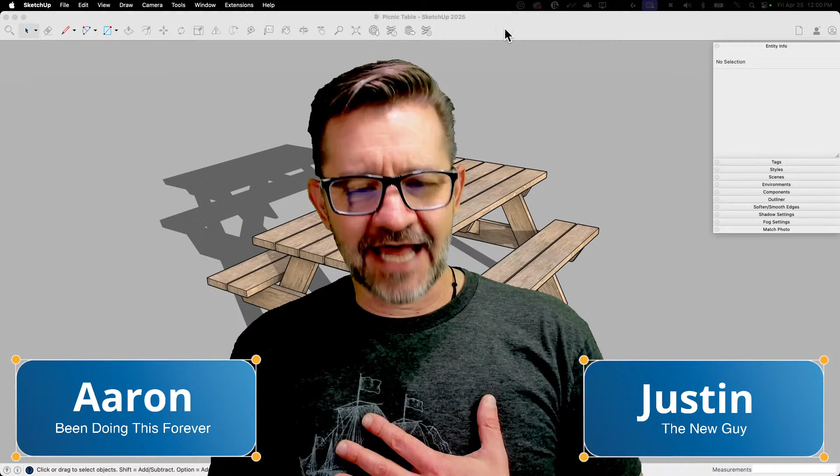Thrilled to be here. First time, a little nervous. So yeah, if my voice starts cracking or if I send an SOS in the chat, please send help. Send help. Let's hope we don't have to send help. I think it'll go good. Justin's not new to any of this. He's just new to being heard by you guys.

So he has been part of our team for quite a while. He's responsible for some of the awesome work we use in marketing, modeling, and that kind of stuff. He knows his way around SketchUp, is what I'm saying. So this is going to be good. Just somebody else to come in and ridicule me on your behalf. I've been doing it in private for the last couple of years, so this is nice to be live. That's right. No, this is not Mr. Geis. This is a different Justin. This is the other Justin. The other Justin. That's right. Yeah, but this is going to be fun.

So you guys may have caught we had some issues. Well, I've actually had issues. Well, okay, I've had issues, but specific to streaming, we've had some issues the last couple times I've streamed where the stream has frozen or dropped, and after that happened 2 weeks ago, we spent the afternoon basically trying to figure out everything it could possibly be, and I think I traced it down to some hardware that needed to be reset. Ripped out all the cables, that's right. Bought the most expensive versions of everything. No, we didn't do that second part. Some cables got ripped out, but yeah. So we think we got a good solution. Been doing some testing for the past 2 weeks, and knock wood, everything's gonna go well. I have not had issues since we did those resets, so I'm really hoping that we don't have an issue today.

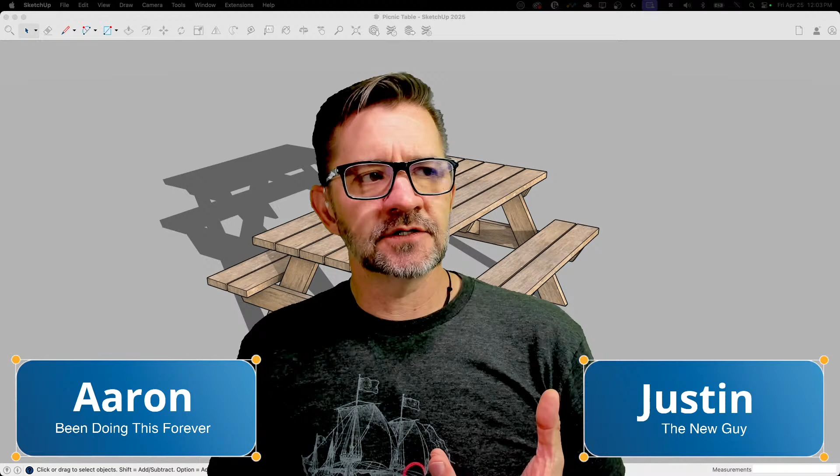One of the misconceptions that we hear a lot with why people don't use LayOut is what they're expecting is like this automatic thing, right? Where you just go in and you say, make my picnic table into a shop drawing. And that's all there's going to be to it. Unfortunately, it's not quite that simple. So we are going to touch on some of the things that I would personally do to take a DIY type project like this and get it ready to send out to my own shop or to give to somebody else to make.

This is not necessarily going to be how everyone would do it. If you're doing a house as opposed to a picnic table, there's different steps, or different deliverables, but the steps are going to be similar. So I don't know, that sounds too much like a disclaimer. I'm just letting you know what our plan is, really. It's going to be cool. Something's going to come out of this, and then that thing will be what it is.

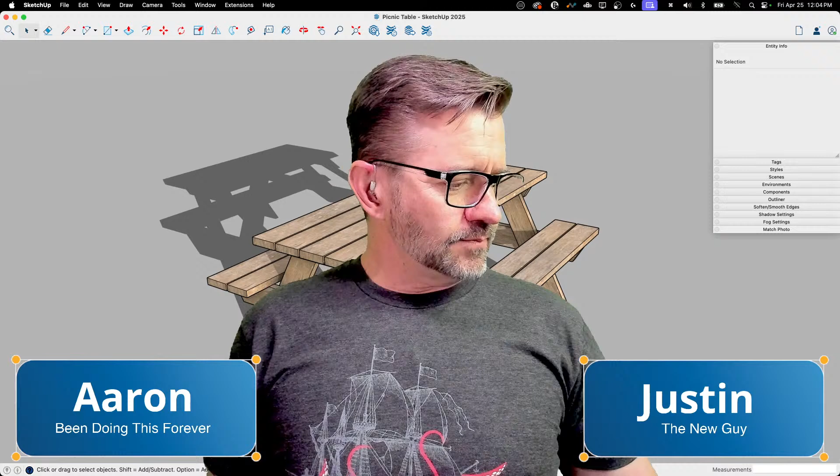Let's roll. All right. Yeah, so let's start by looking at this. This is the table we made last stream. So I tried to keep it very simple. There's actually only two sizes of lumber. There's 2x6s and there's 2x4s. Most of this is all 2x6s. The 2x4s are here as these diagonal braces, and then here underneath the benches.

And that's it. That's all there is. Two different sizes of lumber, obviously different lengths, different cuts, but pretty simple. I did go through and do some high level grouping, right? So the tabletop and the seats are the 2x grouped together. These end A-framey shape things are a group, and then this section, the center, is a group.

And so that's everything we did. I'm just pointing out the grouping because I did that. Just wanted to show you guys. So one of the questions that came up as we were talking about doing this was, can we create a cut list? So not necessarily a drawing; we're gonna do a drawing in LayOut for sure. We're gonna do imagery, 2D imagery that I can print out and, like I said, build from. But separate from that, people were asking, what about a materials list or a cut list, that sort of thing.

So I thought, okay, that's how hard it is for you guys to convince me of doing something. But yeah, we can do that.

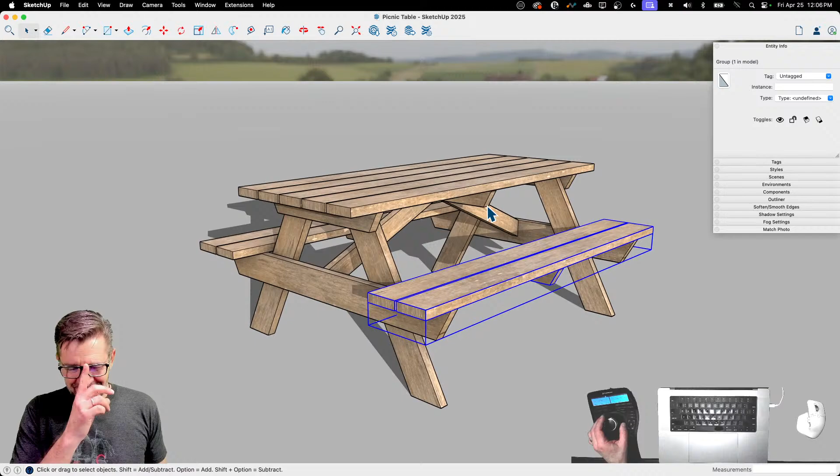So I figured we'll spend the first part of this in SketchUp. We'll go through and we will get a cut list for this right here. I'm gonna use Generate Report. There are extensions out there. There's Make Cut List and OpenCutList and a couple others. I don't have any of those loaded up. We're just gonna use Generate Report. This is gonna be simple enough. Like I said, 2 different sizes of material. It's gonna be pretty quick and easy, and not that many cuts. I mean, we have like 1, 2, 3, 4, 5, 6 or 7 pieces is all.

Cut lengths. I mean, we have to do some of them. Even I could assemble this. I think you could do it. I have total faith in you.

So we'll do that. We'll get a cut list made using Generate Report, and then we will get some scenes set up that I want to use in LayOut, and then we'll take it through to LayOut. We'll put the cut list on the output, and then we'll have a cut sheet and an assembly sheet and all that stuff. So let's go. First thing I'm going to do, it's not save. I'm going to turn off shadows.

So you guys know, we've talked about in our videos, a lot of work has been done on making SketchUp just more efficient, faster design, that kind of thing, which is great. One of the only visualization pieces that has not yet been improved is shadows. So shadows can still kind of bog down your model. So that's why I turned those off. But hey, more opportunity to get even better.

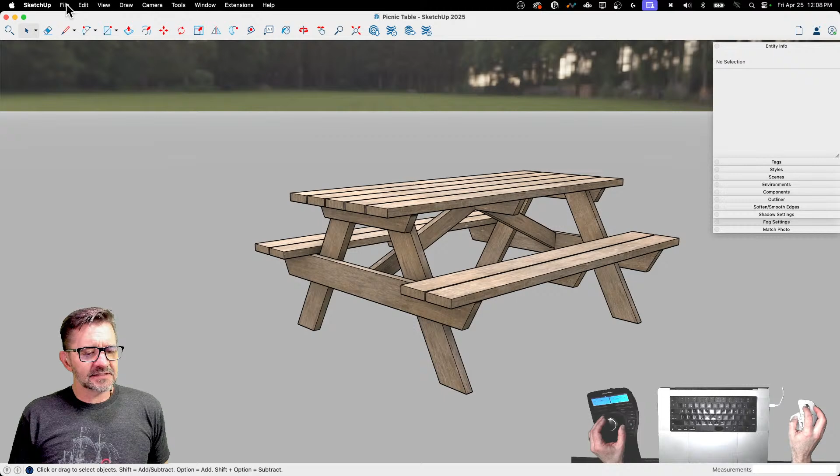Okay, so let's look at this. In case you guys have not seen this, I'm going to go to Generate Report right now. This is the Generate Report window. I haven't saved any templates or anything, okay, never mind. I'm straight up lying because I guess I did this one. Oh no, that's today. Never mind. That's the one I will be working on right now, but I haven't saved any other ones in here, so we're working from scratch. This is what you would see if you just went in and hit Generate Report.

What Generate Report does is it runs through your file and it finds entities, components, or groups that it can report upon, and then puts them into a report, a list, based on the attributes or qualities you select. That's a simple explanation. So what it allows you to do is real simple stuff, like if you want to do a quantity report, like a quantity takeoff. How many rubber duckies do I have in this model? You could run that report real quick, and it'll say this many of this component, and there you go.

But we can go a lot further with that, because we can say things like, sort my material by width, by height, by length, and consolidate by this or that. So there's some options that we can go through. I'm not a master of this. I don't use it very often, is my biggest issue, but it usually comes back pretty quick. So we'll do this.

It'll be great. It'll be good. Yeah, go for it. No, I just thought you had a comment. Yeah, no, it's going to be great. I haven't really used Generate Report either, but I consider this a learning exercise, and this will be good to see. It's going to be something. I promise you that.

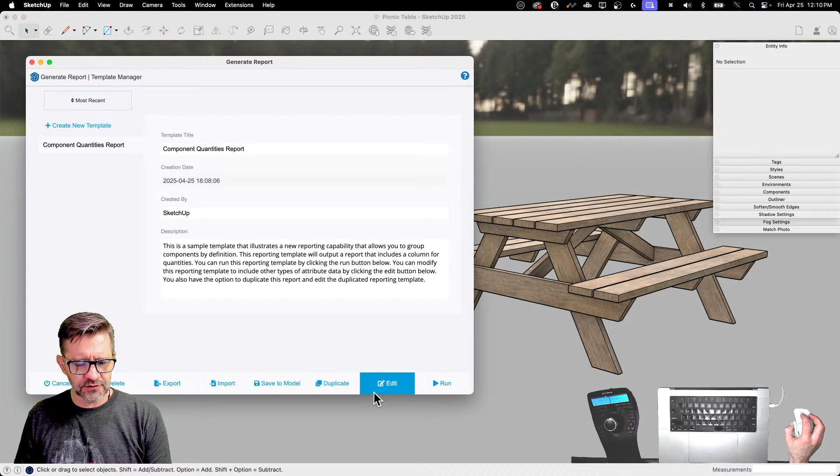different from what's here. So what I'm going to do is I'm going to create this new report, we're just going to call it like a table cut list, specifically designed for this table right here. And then I'll hit edit. So there's a couple things in here right off the bat. I'll try to get everything on screen.

My head's not in the way. Nice. That's professional, right? That's just professional experience that I'm not covering something up with my face. Look at everything's on the screen at once. Sorry, just had to pat myself on the back, I guess.

All right. So with this, the first thing we have the ability to do is say, do I run this on the entire model or do I want to run it on the current selection? Personally, I almost always set this to current selection because what I'll do is then intentionally go through, pick the pieces that I want to run the report on, and then say, now just run the report.

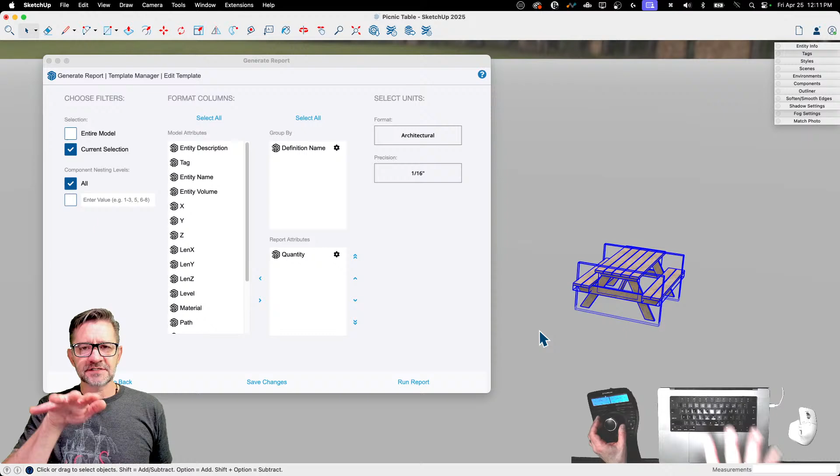The reason this is important is a lot of times as I start making these kinds of models, I'll have duplicates of the same geometry over and over. So when I'm done, what right now is just a picnic table, this same model is going to have copies of all this material laid out for cutting, different pieces in different phases of assembly. So while I have 1, 2, 7, 9 of these boards right here, the final model might have like 22 of them. So I want to be very intentional about what material goes into my cut list. So that's why I usually leave it on current selection.

All right. The next thing, this is very important. Component nesting levels. So I have an option for all levels, or I have enter the level that I want to report on. So what a level is, remember I was talking about how I grouped all this stuff together? Each group or component is a level. So my top level would be what I can select from the outside, right? So here, I have 1, 2, 3, 4, 5, 6 groups. So if I was to say only report on level 1, I would get reports on those 6 pieces.

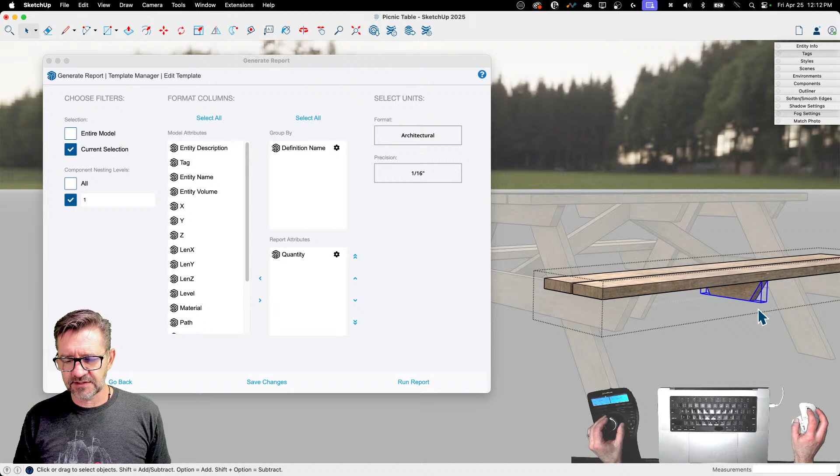That wouldn't do me very much good because I can't cut this piece, right? This is 3 separate pieces. What I actually need to report upon is a level deeper. So this piece plus this piece plus this piece, that's a second level deep. I think that works for all my groups. I'm just going to verify I don't have anything else grouped together. Yeah. So if I run my whole report on level 2, that should give me cut lists for each of the pieces that are in those larger groups.

I said should just now. Fingers crossed. I'm not a huge fan of the term should because I think things are or are not. I don't like when people tell me should, but sometimes I use the term should because I'm not 100% sure. We're doing it live. That's right.

So to the left of that, here's the attributes I can pull from a model. And here's where I actually have them. Here's what's going to be reported. So in here, I have definition name. So remember, as we were making these, let's pull this up. If I come into this board right here, we tagged each one with the actual material length. We're going to change all of our tags. I didn't put this together with the intention of running this report. So we're going to change some stuff.

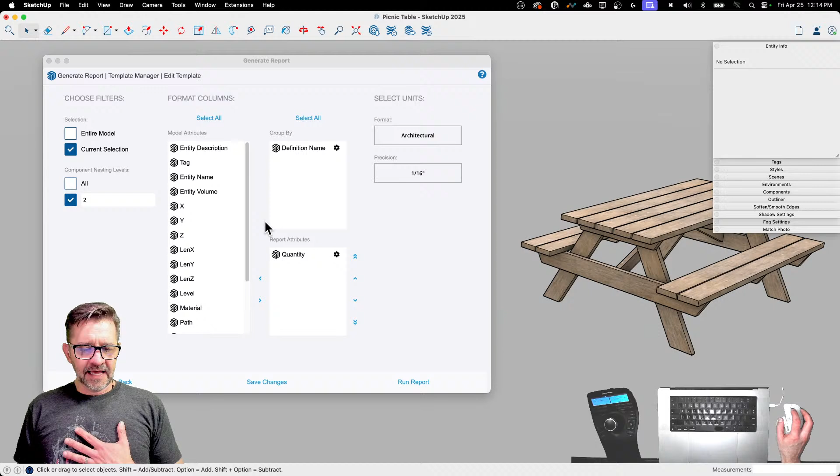But definition name is whatever it says right here, definition name. So if I come into these ones, here's my different pieces. That's what it's going to report upon. And it's going to report the quantity of each. When it runs the report, it's going to use architectural, which is fractional inches, fractional feet inches, and then I have the ability to set a precision. So I can set my precision up to a 64th of an inch. For something like sawing wood, a 16th of an inch is plenty for me.

I'm not doing some amazing Japanese hardwood. So this stuff's all coming off the framing bunk at Home Depot. 16th inch is plenty small for me. Yeah, we're making a picnic bench here. I mean, come on. If you can have picnic on it, I think that's good enough.

Is the top like this more or less? We're good. Right. So I'm not going to do anything else. I'm going to say my current selection. I'm going to say go to the second level deep and give me a full quantity of each type definition name. I'm going to do a select of everything, and I'm going to say run report. And here's what we get.

So this tells me, okay, this thing called 11-inch 2x4, I need 2 of them. This 2 foot 3.5-inch 2x4, I need 3 of those. And this is all I set it up for, was give me a total quantity of each one of these things. That's awesome. That's simple. That works.

The nice thing about having this list, this number right here, is when I go into like my cut list or my drawing, I can actually use tags to put that name onto the materials. It's not great because, like I said, unless I want to go beyond this, I'm a little bit limited by the amount of information in here. And also, I kind of fudged some of these numbers because they were about what length they were, not exact.

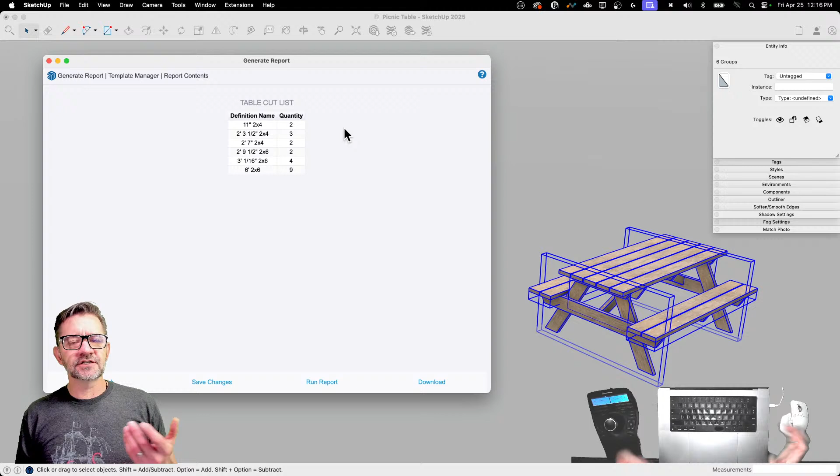So this is okay. So right now, if I needed to know how much lumber, I could use this right here to generate like a consolidated cut list. How many 8-foot 2x4s do I need? How many 12-foot 2x6s do I need? I could use this list to go figure that out. That could be how I use this.

Let's look at going a little bit further and actually getting like the width of the material and then let it report upon the length. Let's see how that works. I'm going to go back and we're going to change some stuff in here. So we're going to look at these values right here: X length, Y length, Z length. So I'm going to bring all of those over here. All right. I'm going to actually take definition name off. I don't necessarily want that right now.

Ooh, material. That might be kind of fun. All right. And then we will... I don't remember which is X and which is Y. So I'm going to do this wrong. We will definitely want to report the cut length down here. And then... yeah, I'm actually going to get rid of material. I'm going to run it. I don't know. Let's see what happens. Okay, that was wrong.

All right. I mean, this is not bad. This would be usable. It's workable. So right here, my Z lengths, I was consistent. That's the important part. The important part is not what was Z, what was X, what was Y. The important part is when I created, because I started with one piece and then they were all the same. I know with some things like the cut list extension. Okay, so quantity, Z length.

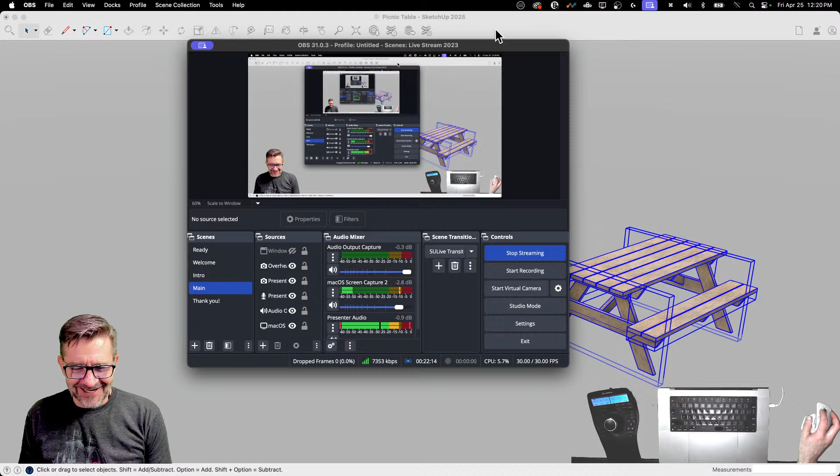Okay, we might be back though. Might. Should. Oh, we should be good. All right, that's good to hear. All right. Yeah. Looks like we're back 100% now. Okay, so let's do a quick sync check. Audio, video. That sync up right? Yeah, looks pretty good on my end.

We're probably all a little sensitive too right now, right? I think it's something about picnic benches, like it's got a curse. We should just go back to modeling sharks. Yeah, apparently. I mean, hey, say what you want about that boring, terrible video card modeling. It was smooth. Totally. It was horrible and terrible to watch, but it was great. Okay, let's keep moving here. Ugh. I don't even remember what I was doing anymore.

So I forget. I want to consolidate by, yeah. All right. So there we go. The simplest, easiest possible cut list I can make is this. So we're going to consolidate by Z length because that's the actual cut length I want to do. And then also display the other sizes here. If we run that, I need 11 inches. I need 2 cut from a 2 by 4.

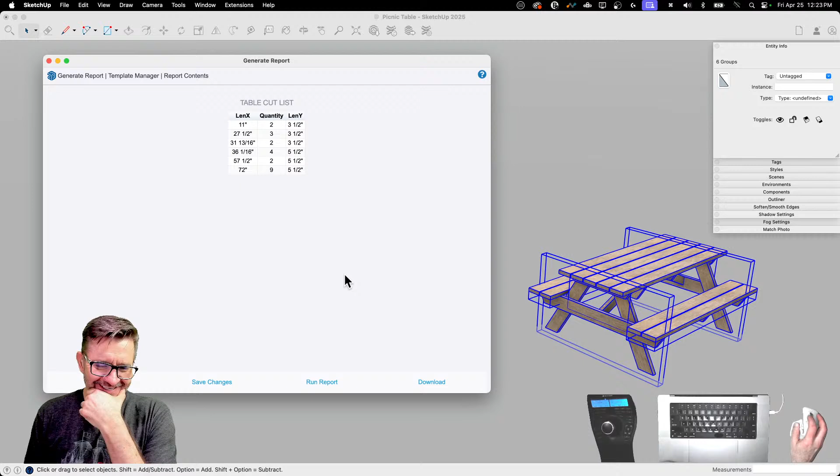That's right. Ooh, what kind of wood is that? Don't know. Yellowy. I don't know. Yeah. It's not plastic. I like to call that an X tree.

Yes. I'm trying to think how to most easily get this into a table in LayOut. I think I can just copy this, and then I'm gonna hop over here and make a quick scratch document that I can just dump those values in so I can bring them back in.

Alexis has a good question here. Do reports work with groups or do they need to be components? It'll work with groups or components. So in fact, just to show how this train wreck could have gone, if I run this on all instead of 2 levels deep and run it again, yeah, see all this other stuff it shows? These are the outside containers. So you can see rather than where I had just 3.5s and 5.5s before, now I have something that's 57 by 3. So these are those outside containers, those groups.

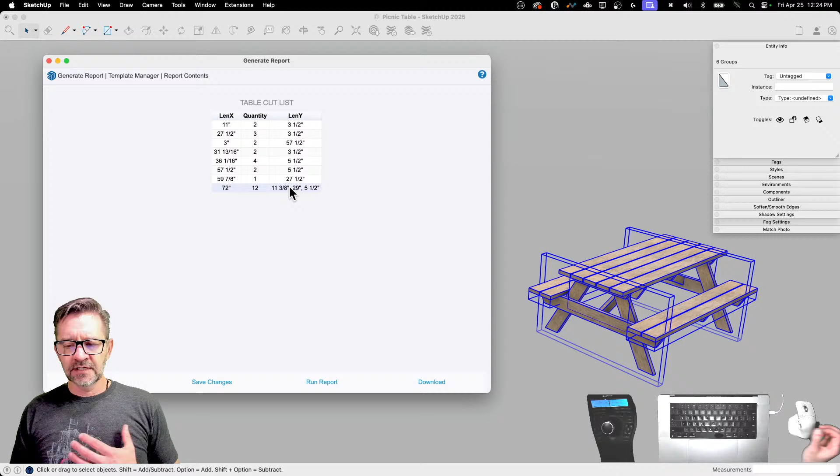So you can see that you do need to be intentional about how you sort your material. In fact, if you wanted to, one of the things you could do is I could keep this. I could go like this. I could grab this, make that into its own group. So there's my finalish product. I could take that and set it off to the side.

And actually, last time I created a cut list, this is how I did it. And then this one right here, I'll explode once and explode twice. And now everything is on the outside. So everything is just one group deep. And then I could select and run the report on that, which should give me the same exact output as when I was going two deep. So it really depends on how you want to maintain this.

I will admit that for me, when it comes to the point where I'm generating output, I don't always maintain the cleanest, best files in the world. They're not hero models. So this thing right here might go out, save that as its own component, save that as its own piece over here. And my working model may actually be a little bit of a mess, as long as what gets to LayOut is what I need and it looks good and works there. Yeah, it's good to be honest. Sometimes your model's a mess.

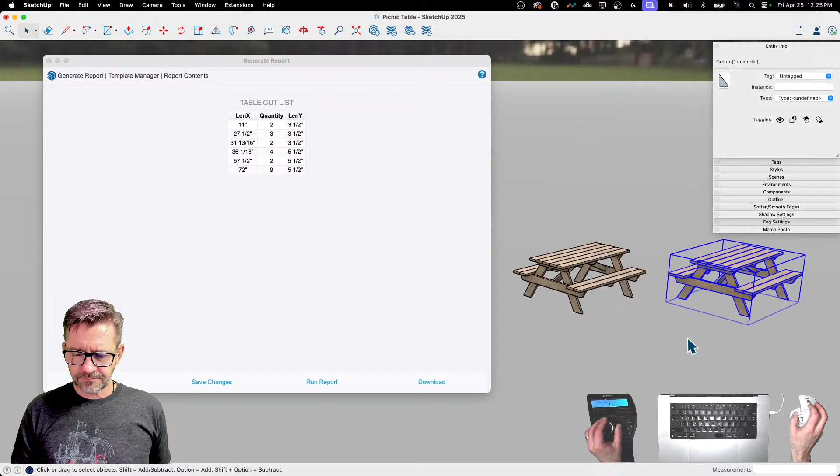I try. Okay, so what I did off camera, again, just trying to be transparent with everybody, is I don't actually have Microsoft Office or anything like that. Everything I do is through Google. So all I did was copy that text and paste it into an empty doc that I can copy and paste back in. I could save that into a file that I then re-import later, but that would mean saving the file, downloading it as a different format, and I'm just trying to keep it simple. So that would be an option, to save it out like that.

All right. I'm going to go to View, get my axes back on. I turn my axes off when I generate thumbnails, so that's why it was gone. That's why the shadow was on, because that stuff looks good. Yeah, real good. And those materials too. I think we should take a second to just talk about the materials. My goodness.

Yeah, the only problem is it looks like it's made from reclaimed lumber, or was built like 10 years ago. It has been sitting outside, but that's okay. It's seasoned. Pre-seasoned. Tasty.

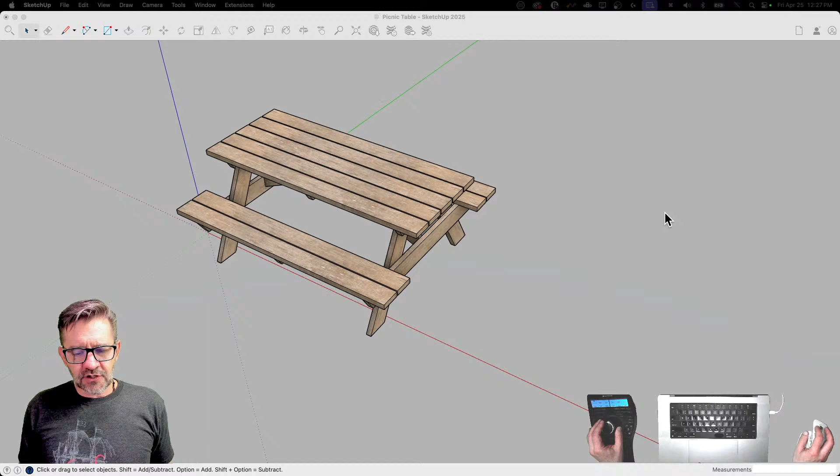I'm going to maintain my hero over here, that'll stay so I can get a nice picture, maybe turn on shadows and ambient occlusion, get a nice looking thing to slap on the front, because I'm making a little booklet showing how this goes together. Over here is where my mess will be.

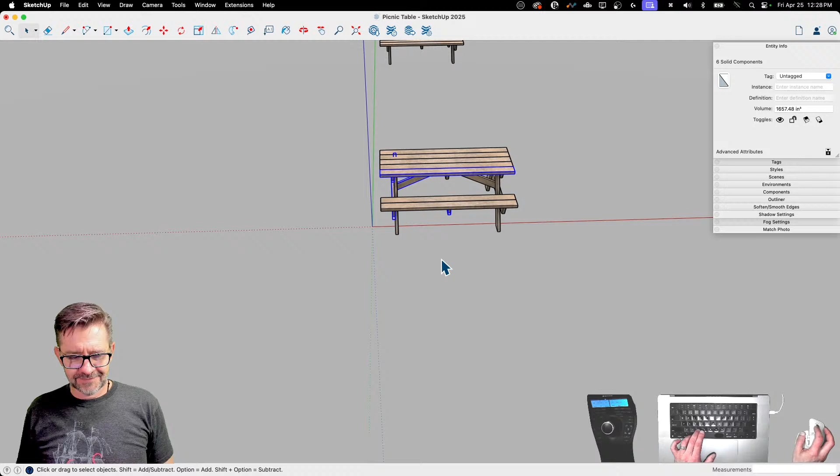First things first, I want to grab one of each piece of this model. So one of this, one of this, one of this, one of this, and one of this. 1, 2, 3, 4, 5 different pieces. Wait, 1, 2, 3, 4, 5, 6. I'm missing one. 1, 2, 3, 4, 5. No, I got them all, I just didn't count right. Nice. Math.

Who knew design would require math so much, man? Ugh. Every teacher I ever had was right.

Okay, so again, I've spoken to several different people about how they lay stuff out for their output. A lot of people do this differently, but I'm just a big fan of grabbing my stuff and throwing it on the floor. So I'm going to do that.

I'm just going to grab each one of these, slide it on over here, and drop it. Oh hey, back off, get in my face. All right, there we go.

And of course I want everything to be the same orientation, so I'm going to get everything laid flat like this, put it right here. And just so this looks nice, I want a consistent spacing between each of these pieces on my cut drawing. So I'll come over a consistent length, let's say like 12, so maybe a foot apart like that. That's good, we'll grab this one.

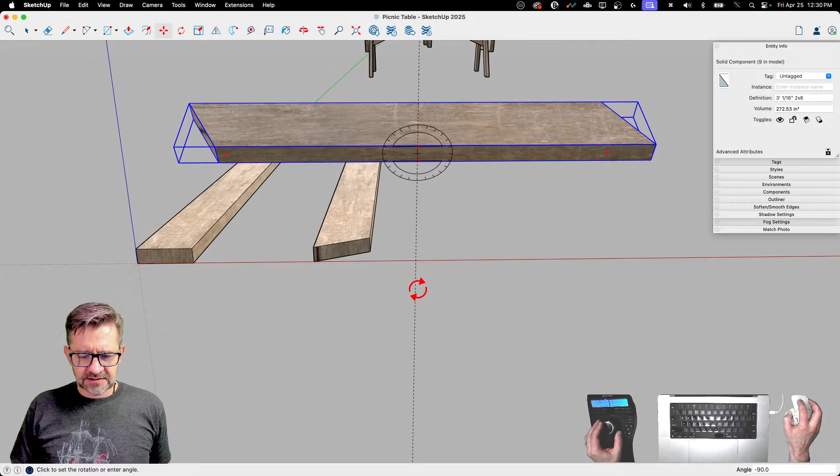Again, I want to get everything laid flat, so I'm going to turn it like this, and then turn it like this, letting it snap to the axes, and then turn it one more time like this. And there we go. Slide over 12.

We get this question a lot from people newer to SketchUp: when I try to move a thing, I can't snap to the thing I'm trying to snap to. When you're in perspective, you've got distances between the camera and where you're clicking, so sometimes it's hard for it to figure out if you want to snap up here or back there. One of my solutions is to flip the whole thing upside down and go underneath to snap things around. Sometimes that works, sometimes - nothing's foolproof. Very Stranger Things-esque, cut list in the upside down, baby.

Oh yeah, sometimes I'll just throw - I'll draw a rectangle or a plane on the ground and just snap everything to that, then delete the plane.

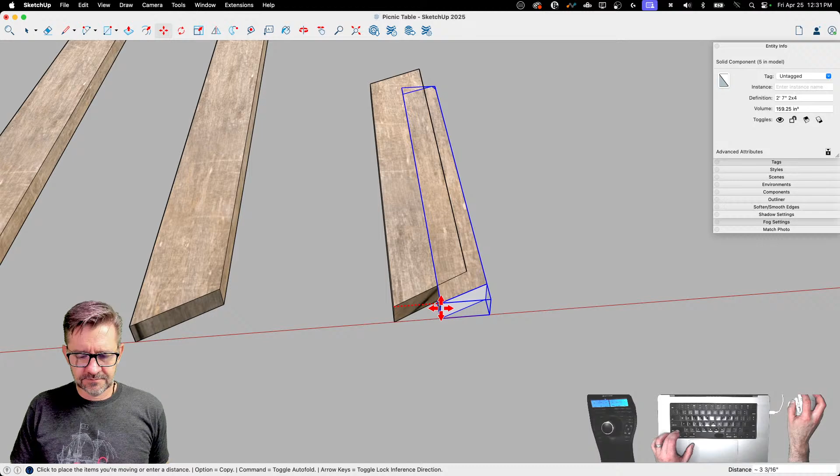That is great, let me show you exactly what Justin's talking about because that's a great call. Yeah, because then it's all on the same plane. It's easy - you can even use the extension to drop everything down onto that plane too. So if I'm working on a plane like this, it's real quick and easy to just take this and go straight down, dropping it vertically till it hits. And I'm done. Very quick.

This way, and then I'm going to flip around. Actually, I'll go this way - I'm trying to align my cutting so it's the same direction as well. Oh, I thought these were the same angle. I thought I was going to get away with that.

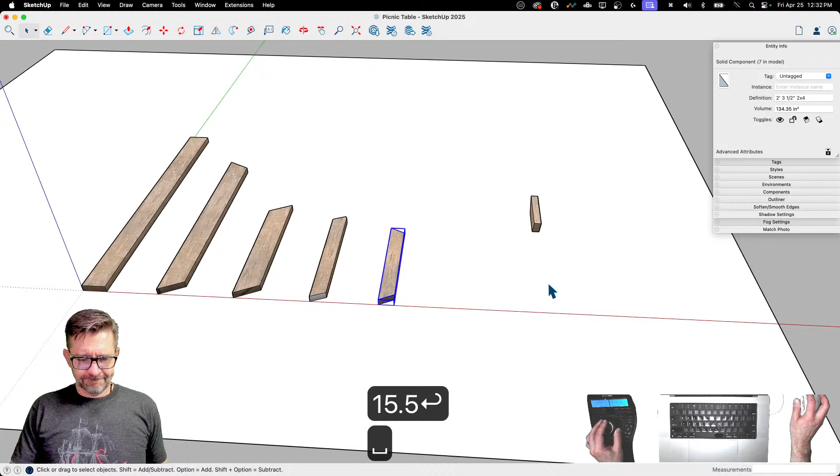So this is stuff that I can make the call on. I went from longest cut length to shortest cut length. In theory, all my materials happen to be the longer cut lengths are 2x6 and the smaller ones are 2x4, so it worked out well, but I might have to make a call if I want to keep my same material cuts the same or not. I don't know. That's a thing to think about.

All right, here's a thing I want to look at. So my materials here, if possible, it would be great to have all my angle cuts be the same. So if I grab a tool I almost never use, which is the protractor, I see that that's 28.6 degrees. I don't remember how we actually came up with that. That just looked nice, I guess. That's 28.6.

It's an aesthetic choice, that's right. That one was 28.6 too. Okay, so most of these are the same. I use the same end cut. I don't know, that was 2 weeks ago. I don't know what I did.

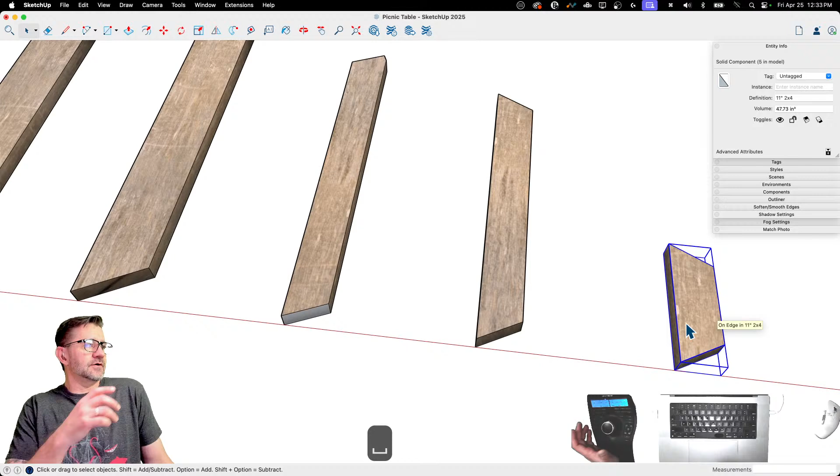This one ended up as a different cut because this is that angled piece that comes right here. I could spend time, I suppose, sliding that vertical piece up and down so I got the same cut, but this seems like one cutting different or one angle different is probably not worth going through and adjusting my entire design. As soon as I start moving that stuff around, then my other cuts change, and I'm not going to mess with that.

So I think we're good. I think this is going to be my cut sheet right here. So what I'm going to do to actually prepare my scene, I'm going to go to a direct overhead view. I'll go to camera, standard view, top. So now I'm looking at from the top down. For this particular scene, I don't want perspective, I want just a straight-on look.

So I'm going to go to parallel projection, and I'm not using my 3D mouse at all now. A 3D mouse is really hard to keep everything flat in plane. It's real easy to just kind of start moving it around like that. So I'm only using the scroll wheel on my mouse right now.

Orbit, which I did not want to do. I just showed you what not to do. All right, let's try that again. Let's go back to camera, top view. And then I'll just roll this up until it pretty well fills the screen. That looks good, I'm going to save that as my first scene.

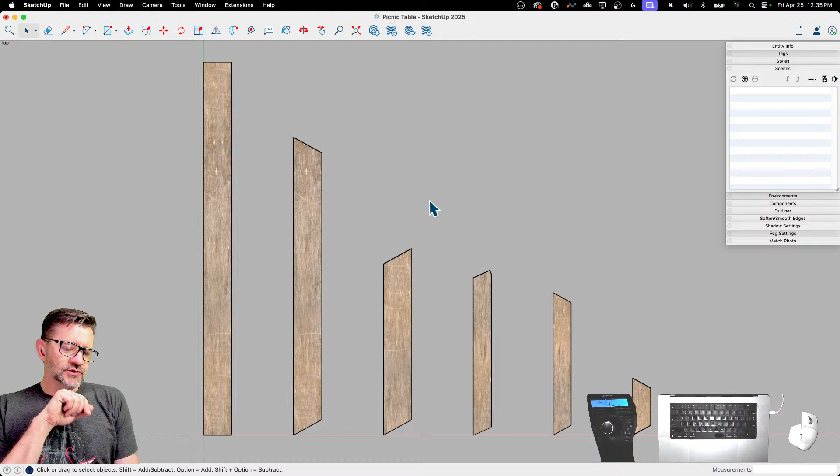Actually, one moment. Something else I might do at this point is consider my materiality. Like Justin said, that looked great, it was awesome. If I print this out to take out to my shop and work off of, I don't necessarily need all this wood grain and scratches and stuff in my wood. That doesn't really do anything for me when I get to the point where I'm cutting. In fact, if I'm really thinking the process through, it would be great to have this all be black and white so I don't even have to mess with color tone or anything like that.

So I may consider at this point changing to something else. I may actually come in here, let's go to view, go to face style, and we could consider the most basic would be this monochrome view. Yeah, good old monochrome, love it. I think that simple looks great. Yeah, so let's save that. You could also do a hidden line, but monochrome is nice. Yeah, that gives me a gray color instead of straight white, so that might look good.

I am going to name my scenes as I create them. We're going to call this cut sheet. All right, there we go. Now, up next, we'll work through this thing.

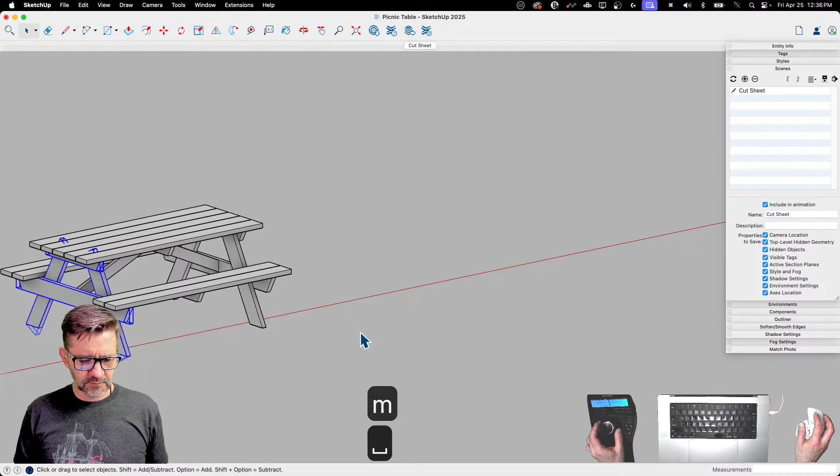All right, so the next piece might be, how would I assemble this? Here's what I'd probably do. I would probably make my little A-frames next. So I'm going to copy that, copy those pieces, slide this off to the side like that. And then we'll come back here, paste that, and then we'll take that whole thing.

You know, after all these years, I still really, I'm always guessing about red or green. Me too, I have to admit. People ask for tricks, and I'm like, the trick to knowing should you be in red or green? Yeah, I'd love to hear that.

All right, so there we go. I think that's going to be enough. Let's go to a camera, camera standard top again, so I'm looking straight down on this thing. I think that looks good.

Something I might want to play with here is back edges. So by hitting K, I get these dashed lines. Do back edges go into layout? Maybe, let's find out. All right, yeah, we're gonna find out. Let's do it.

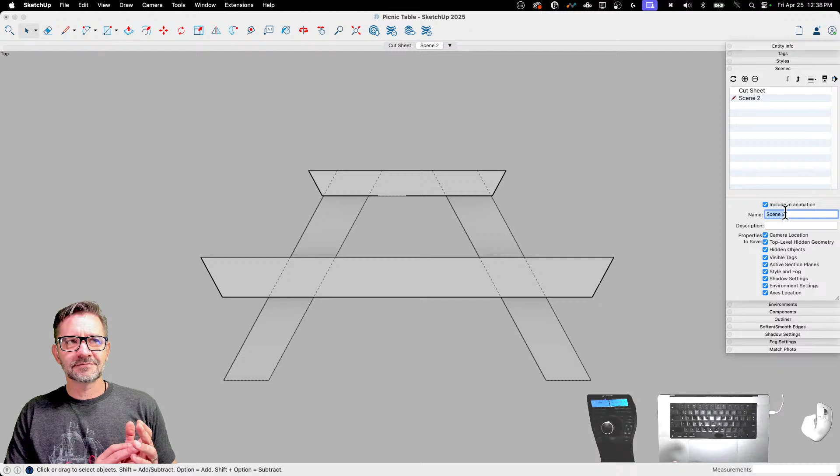Unless somebody in the chat knows, if you've already drawn this and gone into layout by now, let us know. You get a gold star. I don't know what deserves the gold star, showing it is or showing it isn't, but let us know. That's right, folks, we're handing out gold stars. Virtual, of course.

All right, so I'm going to call this one step 1. Should work though. If not, you can always throw it into wireframe or something, or I can draw these lines. There's a bunch of ways to do that. We'll get dashed lines in there to let us see through the material regardless.

Back edges don't show up in vector or hybrid. But does that mean they do show up in raster?

So for my next step, what I would probably say is build 2 of these, and then my next step would probably be like this. Stand that up, get these pieces on, and then we can turn off back edges now.

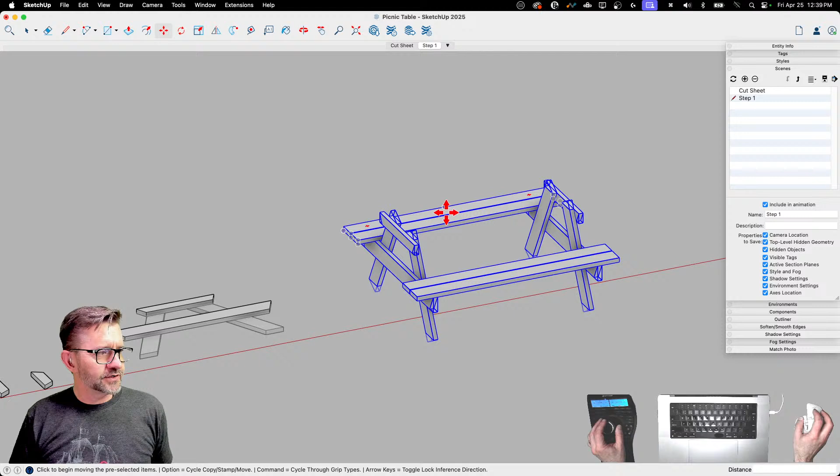K is the shortcut for back edges, in case you all were wondering. They do show up in raster. Cool. Because with this piece, I'm not really that concerned about showing materials, so that should be good for me.

All right, let's go to an ISO view. What am I doing? Okay, ISO, get that 45-degree view like that. That looks cool, I like that. I'm going to use that as my next piece, my next view.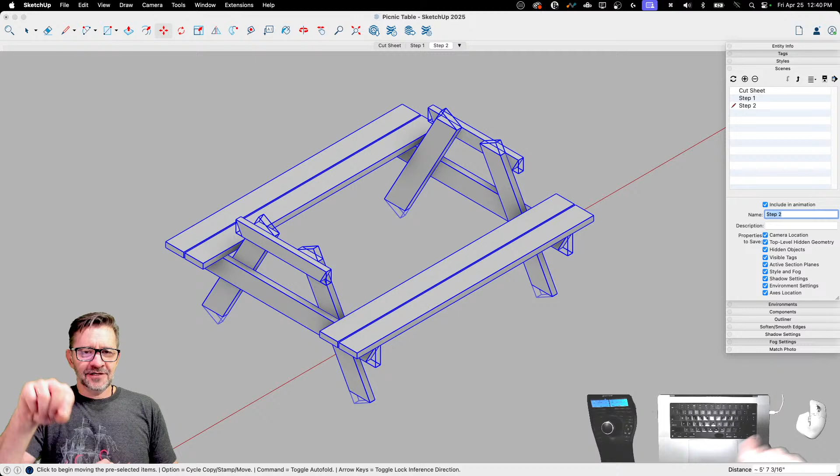Yeah, I like this. This is like a nice progression from one piece to the finished table. It's not like some of those images you see where it's just like, alright, draw a circle, and then the next step is here's the line. I know you follow some artists online, and it always cracks me up when it's like, draw two circles overlapping, draw a U shape, Shrek. Like wait, what? We missed something there.

All right, next one. Oh, I'm working in ISO, and it's making me a little nauseous, honestly. You sound like Tyson. I can't, I just can't, I'm not, I can't do it. All right, you know what, this is my preferred view actually. Really? Oh I know, crazy brain man, I don't know how it works, but somehow.

All right, this would be my next view, is to put these planks on here. Yeah, I don't know, I could probably argue putting the braces in there before, but I'm not gonna argue that because I don't want to do it.

So step 3 is gonna look like that. All right, step 4. I have 5 steps total. Step 4 is going to be putting these pieces right here.

For this, I'm going to take this whole thing. I'm going to flip it. Whoop, whoop, nope. All right, there we go. Flip this whole thing upside down.

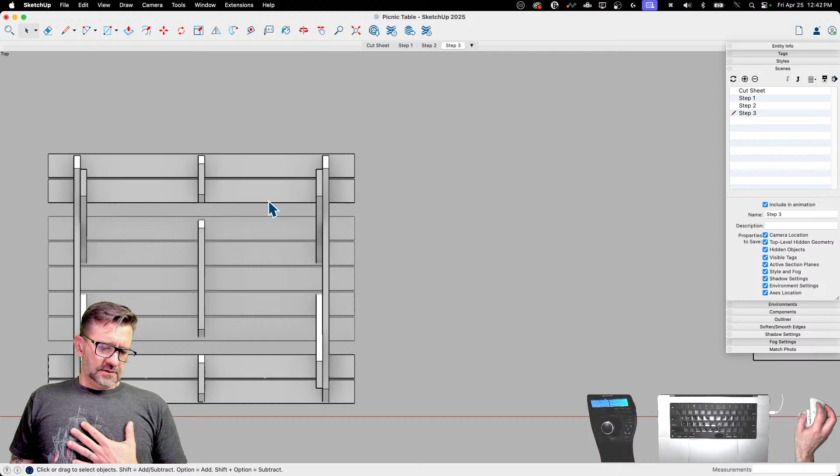Go to a top view. Is that confusing? This shouldn't be here. It's not ideal, but I think it'll work. Yeah, it looks like the top of your bench there is below the surface. It is underground. Underground. Let's move that up to, whoops, settle down man, jeez.

There we go, so now let's try go into a top view again. Yes, that's going to work. I knew something was off. All right, there we go. Another step, we'll call this one step 4. And then one last one.

This is the one I'm not quite sure how to display. Maybe we do a section cut on this. Yeah let's do that. Nope, forget the section cut. Let's just erase this, and this, and this. I want to see how this looks. That's clear, I like that.

All right, standard view, front? Yep, oof, all right. I'm going to, as I develop this, as I create this, be turning background off, so it doesn't matter that background's back there, I'll take care of that when we go.

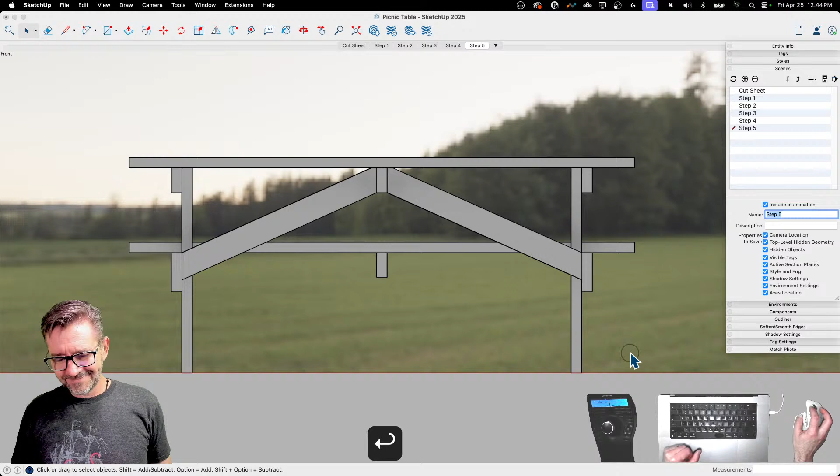All right, although it's a very fitting background for a nice scenic picnic location. That is true, I would enjoy eating a sandwich right there. I would eat it. I would do that too.

Yeah, all right, one last one. I want to get a nice ISO image of my finished picnic table. I don't know for anything specific yet, but we'll see. So I'm going to go to camera, go to ISO again, and then yeah, one last.

Call that ISO. Boom. Let's save that. All right. Yeah, sure. All right. So if we go to our cut sheet, here's our 6 pieces to be cut. Here's assembly stage 1. Put the A-frames together, 2 of these, and bring them together with the benches. Get the tabletop on top. Flip it over, put our braces in. Put our diagonal braces in. Voila. Okay, cool.

So at this point, our model is ready for layout. So I know, like I said at the beginning, a lot of people want to push a button and have my model just spit out a layout drawing. And unfortunately, that's just not how it works. You do have to tell layout exactly what you want. There are some things that can be made easier through templates, because templates could already have scenes set up and they can automatically populate your model and that sort of thing. That works if you have repetitive builds, like you build something similar over and over and over again.

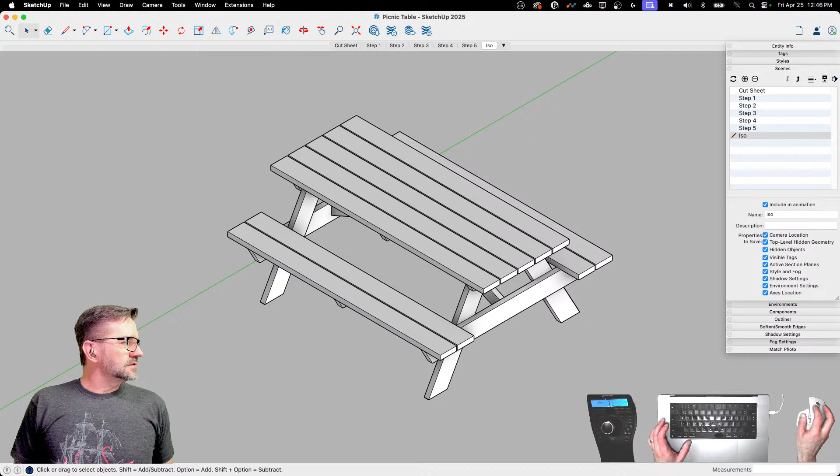So let's go to layout. All right. So I started a blank drawing, a blank document, and there's nothing in this. This is just the blank 8.5 by 11 sheet. It's a standard letter sheet. I am intentionally using this size sheet because this is what I could print on my home printer. So I can print these. So I'm going to let this size dictate how many pages this document ends up being, that sort of thing. Yeah, and we're just going to go from there.

So let's hop in here and let's start with our cut sheet. So I'm going to come in here and I'm going to say, all right, let's insert picnic table. The last view I had on my screen is what layout brings up by default, which happened to be the cover art. You know what I'm talking about. So that's what it brought up. I think I can make that work. I think I like that. I'm going to go ahead and pick on that. And I'm going to change that to a vector drawing. Just a cleaner drawing. It looks nicer.

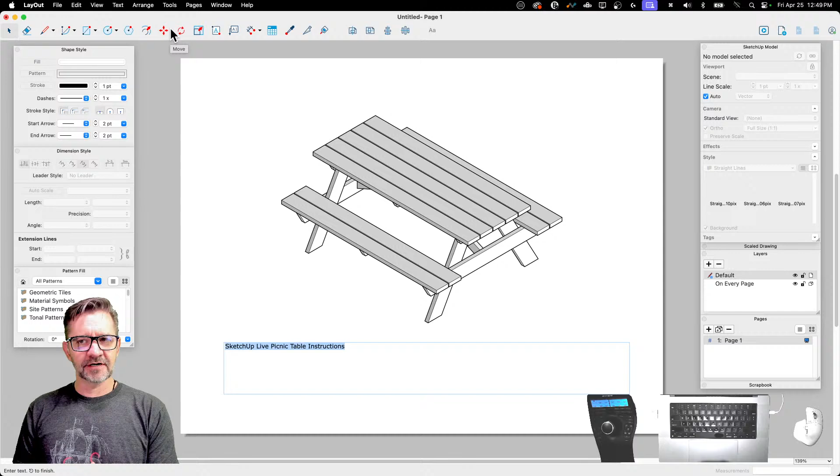Oh, Bill asks, I don't have layout yet, but can you select metric paper size like A4 or A3, etc.? Yes, you can. You absolutely can. I don't because I don't know how big an A4 is. But yeah, there's default. And if you have some odd shape, you can actually create your own templates for whatever sizes you want. So if you have a weird printer that prints, I was going to throw some fun millimeter sizes out, but I don't remember what those are. I'll probably call it a postage stamp page. But yeah, you can absolutely use the defaults, which has the most commonly used metric and imperial page sizes. And then you can also create custom sizes as well.

Yeah, let's bring fonts up and let's go. Oh, too big. I'm yelling there. Whoa. Yeah, take it easy, pal. Back off. All right. Don't put it in bold. Come on. Why do you hate whoever's reading this? All right. We're going to keep it simple. This is what it is.

Layout's fun because, so I like Illustrator, Adobe Illustrator, a lot. I love vector line work. That's a fun thing to do, and that's kind of where Layout sits. The other nice thing is, in Layout I can import any file: images, drawings, text, tables. So Layout gives me a lot of ability to really customize stuff.

But I want to be intentional and make sure we finish this in the next hour. So we're going to go with a simple front page. We'll go from here. Okay. Yeah, we're not going to add any GIFs into this. We're going to keep it. All right. So that looks good. That page looks good. All right, let's start the next page.

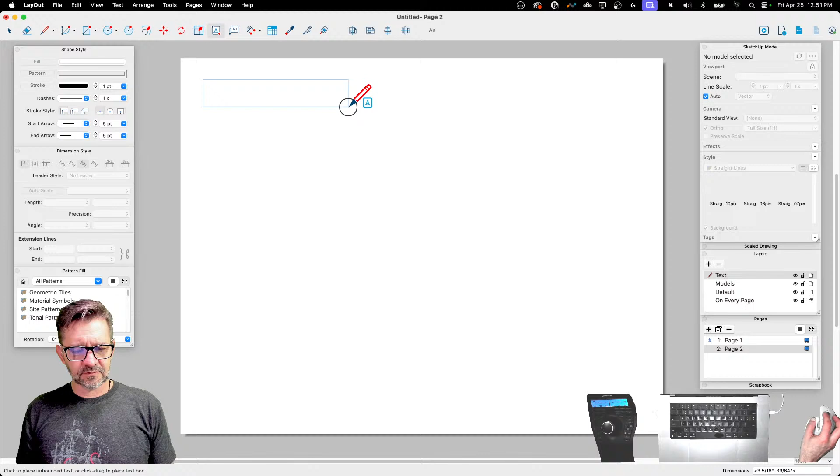I am going to come in and do a couple things to make this kind of a template. So I'm going to come up here. Again, I want to keep this simple, I don't want to get into real heavy stuff, but I'm going to put a title up here. So I'm going to say cutting sheet. I'm doing this on the first page because I will duplicate this page for future pages, so I only have to set this up once. My fonts, let's go ahead and bump that up a little bit. Not obnoxious, but I know what this page is.

And then I'm going to do two things on here. I'm going to bring in my image, which will put all the pieces onto. And then I'm also going to create a new table and put my cut sheet on there. So I'm going to go to models, and I could go to file import. This is my general way of working: if it's the same model, I'll just copy this model and then hop over to the same page, paste it, and then change it from here.

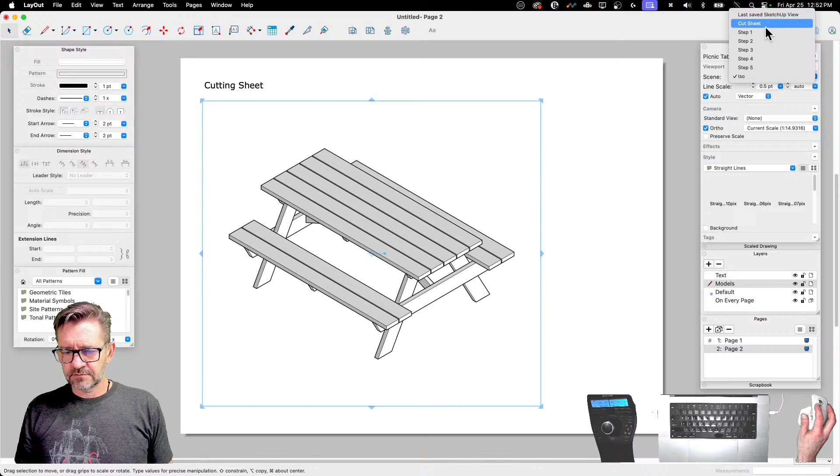So I'm going to make it smaller, make it fit right here. And then I'm also probably going to make it bigger because I want to get that full cut length of that long piece. And then we'll go to cut sheet scene. There we go. All right. That's the first piece I wanted to bring in.

Now, as we start here, one of the big things that comes up is scale, right? If I believe that I or somebody who is assembling this is going to take a scaled ruler and actually measure something off this screen, then I probably want to put this at some sort of a scale. If I am taking this out to my garage and I have a question about something, instead of scaling it, I would probably just check the model in SketchUp. So I would not immediately be real concerned about picking a specific scale.

So that's just my thoughts. I probably wouldn't do that. But if we did want to make sure it stayed at a consistent scale, maybe I'll pick 1 to 12, and then I can actually have a consistency. That's your call on that. Obviously, if this was a construction set of plans, I would want to pick an appropriate scale and make sure all my drawings were to that same scale.

If this is going to be to scale, then I might come in here and create a text sheet and put in scale. Was that not the right auto text? That off the cuff teaching didn't work. I thought it was just scale. Maybe it's not scale. Okay, let's try. Never mind. We're not going to do that. Pretend I didn't say that. All right. So, the other thing I want to import.

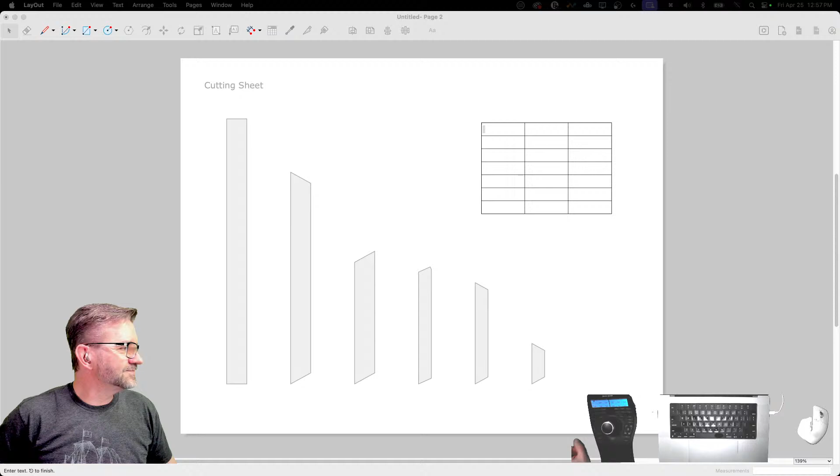Oh, looks like we're back. Wait, we're getting live updates. Welcome back. Now I'm dropping frames all of a sudden, that was weird. I don't know what's going on, guys. I think we might be back on YouTube. You need a full-time IT guy just on standby. I guess so, somebody in my house under the desk, waiting. You need a satellite pointed just at your house. I suppose. Thanks for hanging with us, guys. Not sure what's happening. The universe has a chip on its shoulder about Layout, about picnic benches specifically. This world's just not ready for the Layout magic I'm about to spin.

Huh. Yeah, I don't know. I mean, like I said, it's a little bit frustrating because we spent hours of time streaming with no issues whatsoever. There's just something about go time. What is go time? I think we might be good now. Yeah, Colin says it's raining in Colorado, so that might be it. That would be nice.

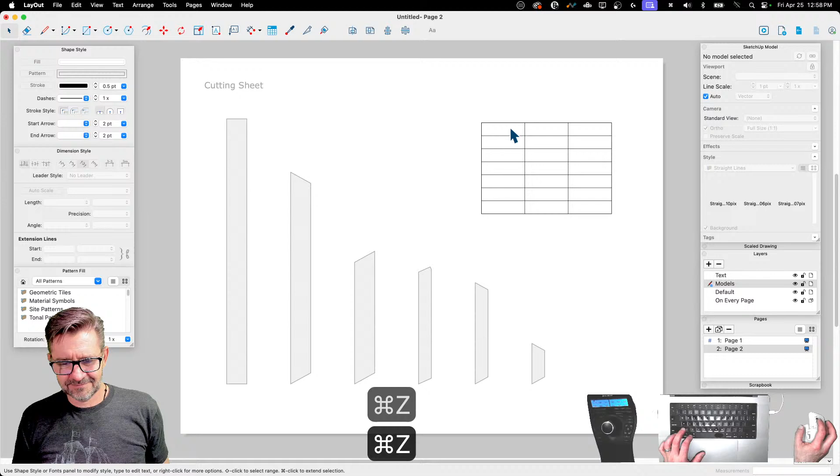Okay, folks. Well, we will keep trying. Yeah, I don't know what's going on. Yeah, looks good. Cool. Go fast. All right. All right. Yeah, good stuff.

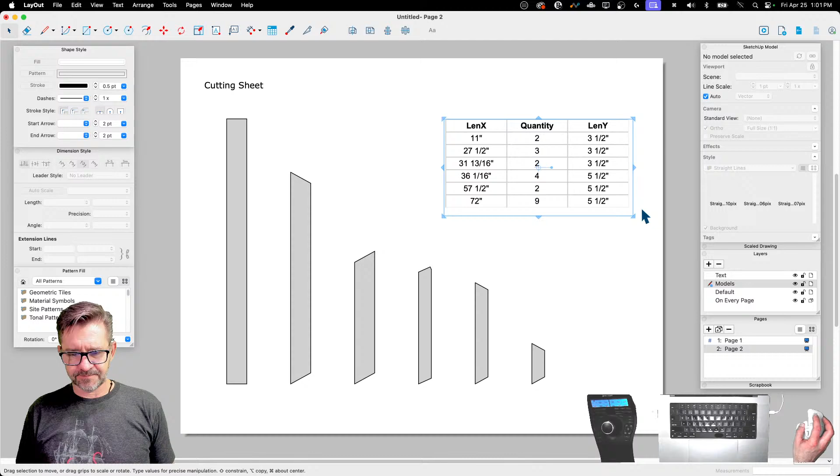Yeah, the next thing that I would say we should put on here is we're going to throw some dimensions on. Well, you know what? Just for my own reference, I would probably put a title on each board as well, but then we'll also dimension stuff. So here's how I go about dimensioning. I'm going to save this. And I'm going to come in here and put a dimension from here to here.

Like I said, this is what I do with dimensioning. I put my first dimension on and I take a look at it and I decide if this is what I want or not. I don't like this dimension. So what I'm going to do is I'm going to clean it up and make it what I want it to be on this first dimension and then make that my default dimension throughout the rest.

So what do I not like about this? I don't like arrows at the ends. I've never liked that. I like hatches. It's just how I am. It's just the architectural way. It's how I came up. Yeah, Justin gets it. So I'm going to put hatches on there. All right. I like that much better.

I think I want to make my font a little bit bigger. Not huge or anything, I don't want it blowing out the screen, but it looks kind of small next to the rest of my text. This is not a dense set of plans. So I'm going to go up here and show my font window again. And yeah, we'll just step up like a 12. Perfect. I'm just going to put my fonts over here on the other screen so it's not in the way, but it doesn't go away forever. All right, I like that.

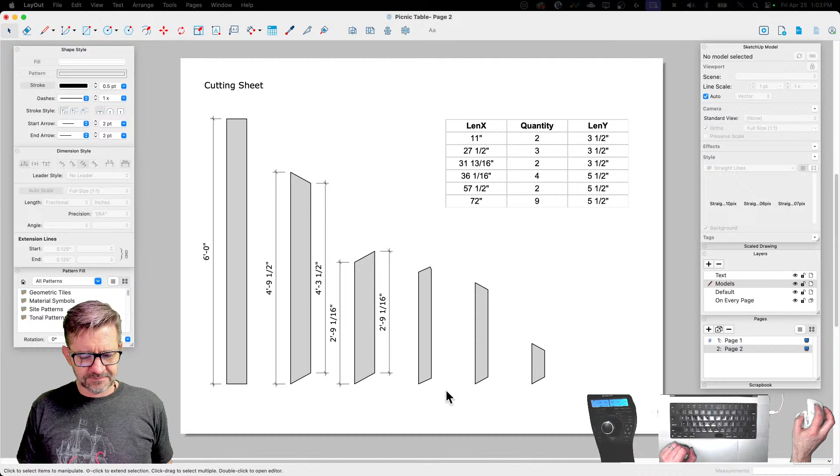And this is what I like for angle cuts, is I like both edges dimensioned. And we'll come back and we're gonna dimension out these angles in just a second as well. Something I don't like is that this is at 32nd. I want to set my precision to 16th. There we go. All right. And I'm going to keep on dimensioning my overall lengths, my long side lengths, short side lengths. Oops, that one. I didn't change that again.

So one of the things I do feel like I want to call out is the fact that some of the stuff I'm saying I do is because I don't do this time and time again, over and over. Some of the stuff I do could probably be done once and saved in a template, but because I don't do it often enough, I don't think to do it. So things like having consistent dimensions on your plans, probably something that's worth doing once, getting it right, saving it, and only doing it once.

All right, now, I don't like this. I'll change that to 16th. I could come in here, grab all of this, and then make sure everything is set to the same. This I don't like because it's floating off here. It's dangling, which works if I had a messier situation, but I don't. It's simple enough to put that there. All right. So that looks okay to me. I could work off of that.

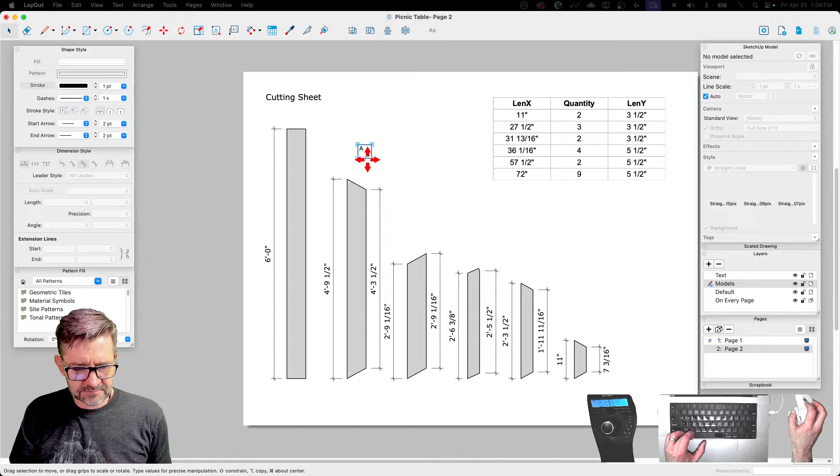And I'm going to put that A right in the piece. Let's fill it too. Let's fill it with white so it stands out. Oh, yeah, that's the stuff. Look at that. I like it a lot. All right, so I'm going to put that there. I'm going to come across, put this here. Whoops, I didn't hit Option. It's not on that one. It's on this one.

What do you think about labeling the widths? Yeah, I guess that would be the other question, is do I need to worry about labeling width separately? Because what I could do is I could do something, and again, at this point, we're kind of designing a solution as opposed to any kind of standard or anything, which is cool. But I could here. Let me.

I can't talk and think at the same time, as you all know. Whoop! See, look at that. Man, I tell you, it's not easy being me.

All right, and then I'll come into this one. This will be cut B, and then we'll call this one cut C. Cool. Because I have two different material sizes, I could go about this a couple different ways. Huh. I could do a bunch of extra dimensions, right? I could come in here and go like this on each one. That's going to get crowded real quick. I don't like that at all.

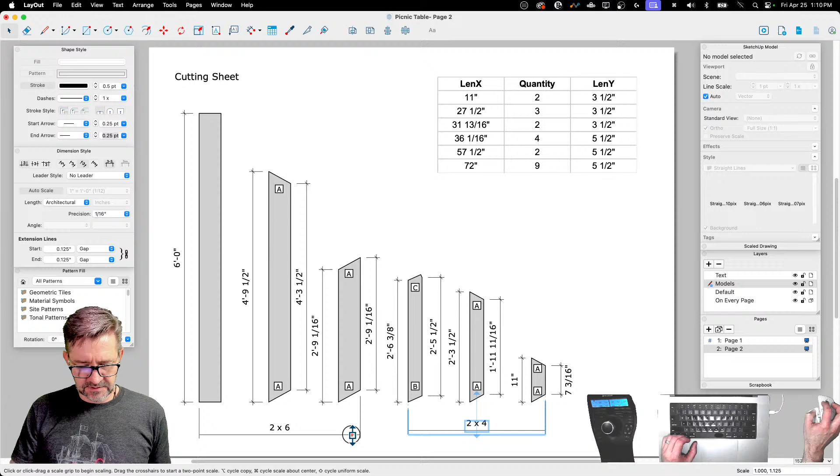We'll line that. So that might work. That's okay. I'm okay with that. Yeah, looks good. I'm gonna move my material list over here because the one other thing I would do at this point, I have 3 cuts here that I'd want to detail out.

Yes, I agree. So Jupe is pointing out we don't actually need measurements if we have all the angle cuts. I totally agree with that. But I also know people like to verify things. So yeah, I could get away with just having the overall length, the long side length, and then that length, which means I could get rid of half these dimensions, but some people might want to measure that. So I'll respect that. All right, I'm going to option copy my model window over here.

This is going to get a little crazy, guys. I'll be honest. All right, I'm going to get rid of preserve scale on this, and I'm going to come in here, and I'm just going to zoom in on the end of this guy right here. Oh, not that big. Let's be reasonable. All right, and that size. Now I'm going to preserve the scale and shrink this window down. So I have just that cut.

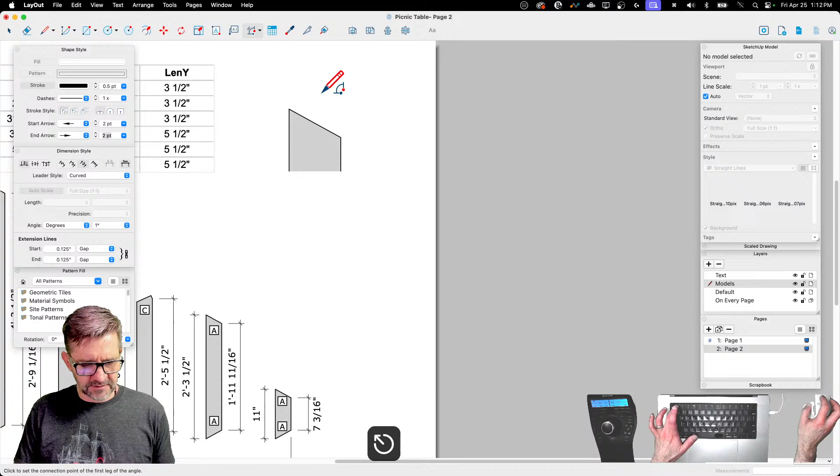And now I'm going to take that cut right there, and we are going to put an angular dimension. My first line is going to be at 90. My next line is going to be down here. Whoop, nope, I did it wrong. And there we go, 29 degrees. And then I can come here and borrow this. Come here, I need to borrow you. There is my A cut. I'm going to go ahead and make that A bigger. Works for me.

And then I might take that whole thing and put it in a box. Something like that, maybe? Put all that together into a group. Again, I'm making stuff up here, but I believe I did something similar to this for some Playhouse designs that I did with Donovan. It seemed to work pretty good. Yeah, this is looking great.

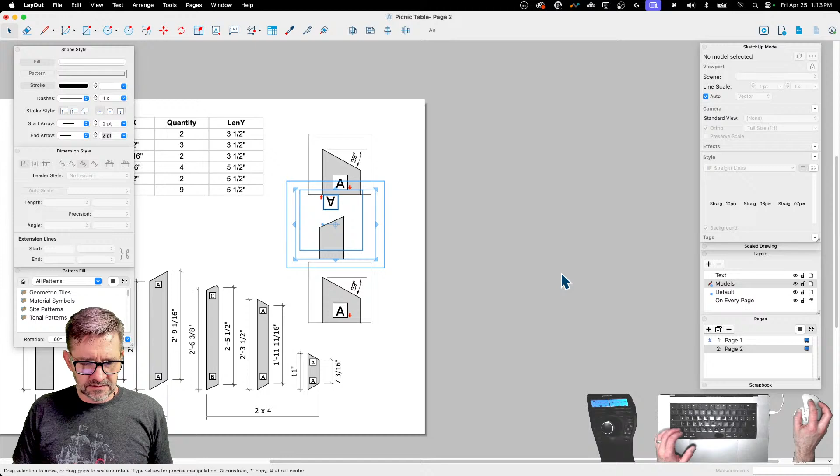All right. So for this next one, I'm going to come in here, delete my angle. There we go. I got to go find my B end. That's the other end of this guy, at the bottom there. And just so all the cuts are going the same direction, we'll flip it. I flipped the group. That's not what I wanted. This is what I want to flip. Beauty.

B. And then another angular dimension. Straight across here. Measure down to here. And there's our 24 degrees. And one more time. Let's come into this one. Delete our angle. Change our letter to C. Come into this drawing, and we got to go a couple pieces over. Uh-oh, I'm lost. Oh, there we go.

It's good that you put all the pieces so close together. Otherwise, you'd be swimming in that view forever. Too true. All right, so we'll get that over here like this, and this is going to have two cuts. So this gets a little less straightforward because I can do a couple things. So I'll get my first cut here. We'll bring that out so I can easily read that. I can do the same thing over here.

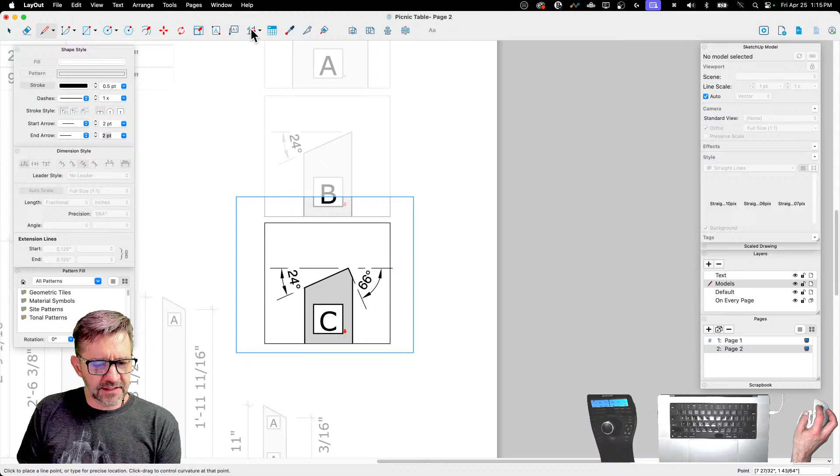But then I still need a dimension. I need to know where I cut to. So I would still have to put another dimension here. Go back to my linear dimensions and say from here to here is this much. But that should be enough to build that. Oops. All right.

Does that make sense? Does everybody believe that that would work? I'd love to hear your thoughts. Yeah, I think I could put that together if needed. Works for me.

So last thing I might put on here, some kind of a naming convention. Because I have 6 pieces, I could probably just give these names rather than calling them piece 1, 2, 3, or whatever it is. But I'm just going to throw something on here real quick. I'm going to call this, what do you call a long flat thing on the top of a table or bench? Plank. Plank? All right. I like it. It's a plank.

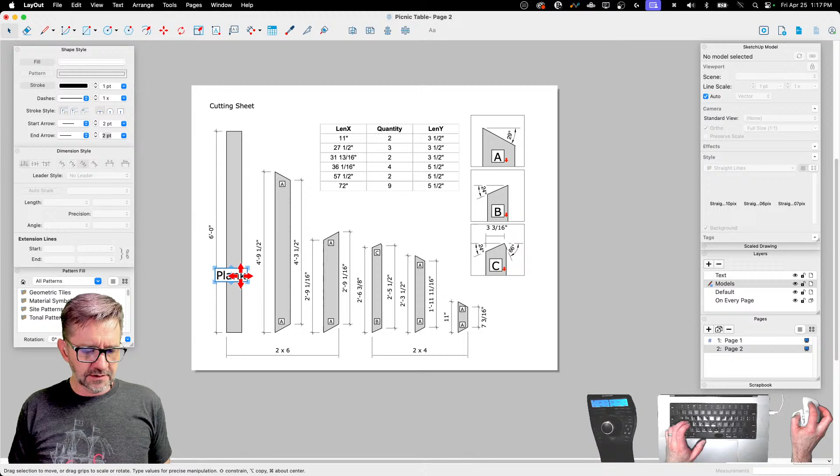It is a plank. All right, and I'm going to drop that back down to smaller text. We don't need that big text. And the next one can be a slightly smaller plank. I think I might have found a flaw in your naming system. We'll see though. Maybe even smaller plank, smallest plank. It works. I didn't know that my on-screen text shows arrow key pushes too. That's kind of fun. All right, so I'm gonna grab this, there. Oh, hey, I said option. Oh no, I didn't. I had shift down.

Randy says Alpha piece, Bravo piece, Charlie piece, etc. Got a lot of great name ideas here in the chat. If I was doing this for some kind of production, we'd come up with something else. But this is a leg,

No, that was the brace, that's the cross piece. This is the leg. I'll name the things I know for sure what they are. There's the leg, that's a leg if I ever seen a leg. This is the cross brace.

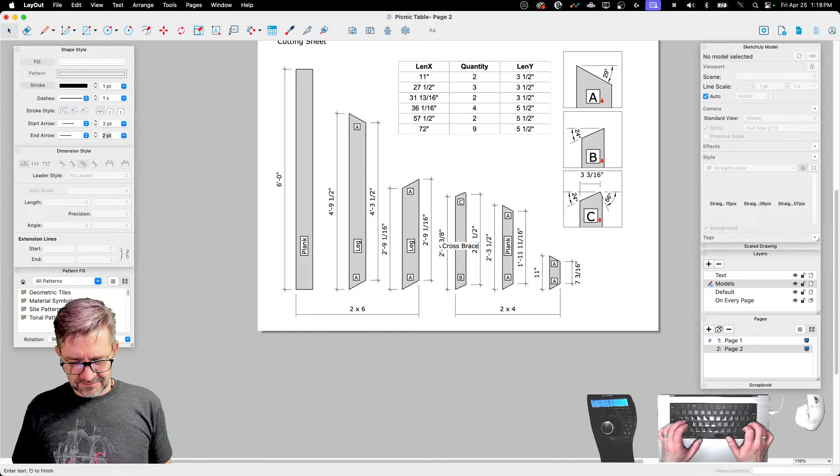It's the A-frame table brace. Or table frame, or table brace. And then this is the thing that goes across underneath the seat support. How about that? We're not copywriters here.

And then little boy down here, seat support number 2. There's no way I'm fitting that between those A's. It's implied what it is, you'll figure it out.

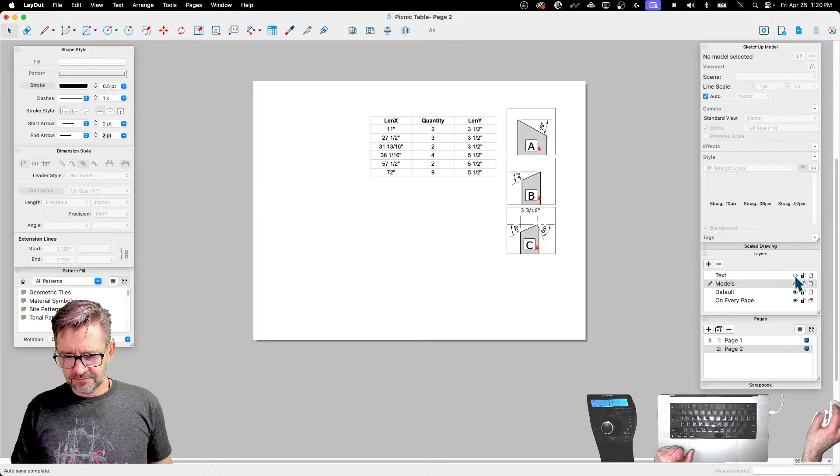Okay, so we are at this point. We have... oh no, ugh. You know what I did? I put all that text on the wrong layer. That's okay, I can fix this. I'm going to grab everything, deselect this, deselect this. And then we'll take all of that and move it to the text layer. Oopsie doodle, all right, no big deal. We're good. Okay, good enough, it'll work.

All right, next page. So we have our cover page, we have this page. We're gonna go make one or two or three assembly pages. I'm thinking what I'll probably do is copy this, even though most of this page is going to get thrown away. This is the closest to what I want an assembly page to look like. So I'm just going to duplicate this page too. I'm going to get rid of this, I'm going to get rid of these, I'm going to get rid of a lot of things. I'm probably going to hold on to this because I'll use that to label the other pieces.

But then everything else pretty much will go away. And this, so this will be assembly page 1. I'm gonna take this, we'll jump this to step 1. All right, and there we go. Because I copied it over from the other page, it's saving the scale too, so this is showing up as a 1:12 scale. So this piece is actually the exact same piece as what I saw over there.

I'm going to note we're in vector and we're not getting our dashed lines that we had before. So that's interesting. Oh yeah, those back edges. Which means somebody lied to us. What if you throw it in wireframe? Let's see, let's see what happens.

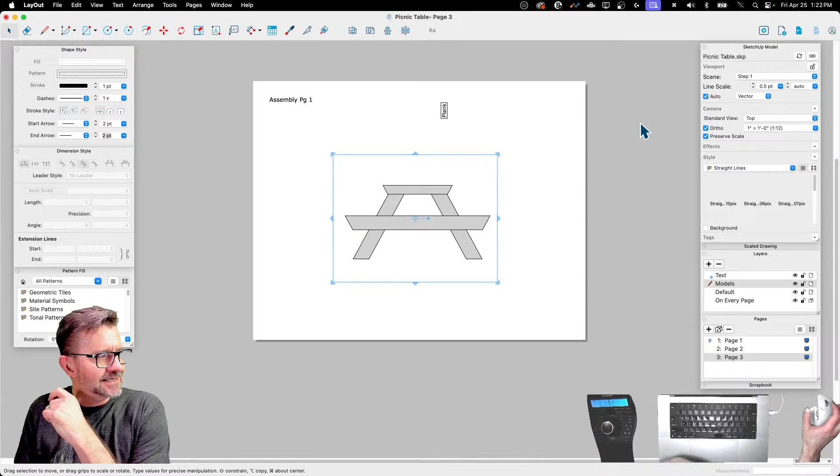If I didn't save it as a style in SketchUp, I don't think I can switch to it in LayOut. But not a big deal, that's okay, because look, this happens all the time. I need more detail than this is what LayOut's for. We can do this, this is not a problem, everything's cool.

All right, here's what we're going to do. I'm just going to draw a couple edges. So I'm going to go to my line tool, I'm going to draw a line from here, just going to carry this through till it hits here. Oops, you know what I did? Sorry, I have a shortcut on my mouse button to go to select or draw, and I keep tapping it, but it's not assigned in LayOut to anything, so it keeps doing the show all the windows shortcut.

All right, I'm gonna undo that. I need to go to my text layer, which is above my model layer, and draw that edge again. There we go, now it's on top. And I will take that edge and we will go change it to a nice dashed line. There we go, that's what we need, that's all we need, check that out.

Nice, crisis averted. Everybody's panicking, we're cool, we're cool, don't even worry, we're cool. All right, so there we go. The nice thing about that too is I'm not beholden to what the back edges look like, because I could come in here and I could say, oh, I don't like those dashes.

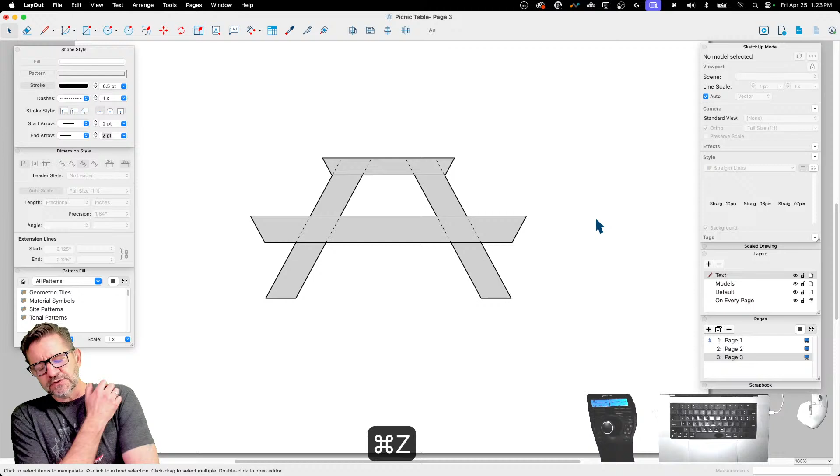Let's go with a larger dash and see how that looks versus this. So it gives me a lot more control to do that too. All right, so there we go.

I am going to grab this and plunk that plank label down right here. And then I'm going to come here. I keep hitting shift instead of option, I don't know what that's about.

All right, and then we'll put— hey, I mean, the key is like 3 times the size. That's true, it is a lot easier to hit.

Slide that over here. And I want to admit that I am definitely going with the any-idiot-could-put-this-together instruction process right now, because I don't want any idiots to be left out. They should really be able to do their thing. So this one's going to be called the seat support.

What was that top piece? Table brace. Ooh, I don't know if I have room for that big of a word. We have to shrink that down. I'll call this one leg, and this one's another leg.

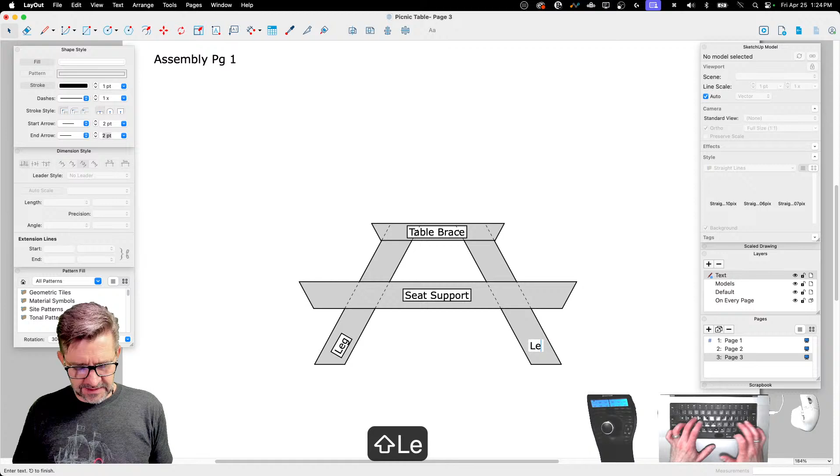Yeah, we will come in here and drop this text down significantly so it covers up less. There we go. Okay, and then of course we'd want to put some dimensions. If we knew this was placed against something flat, I wouldn't have to angle anything and it would line up right.

So what dimensions do I actually need? I need a dimension of this piece off of flat, so I need a dimension that goes from here to here. Maybe how far apart the legs are.

Yeah, so if I go—this is extra, I mean I shouldn't actually need this much, but it's okay. So if I laid, in theory, my 2 legs down, put a board across here to keep the bottoms flat, and there was this far between, I could drop this on. These corners should all meet up perfectly.

So this table, I don't need to show where this is. The only thing I really need to show is where this is, and then maybe this dimension here, so I know how far over it is. That should be enough to assemble that. Cool.

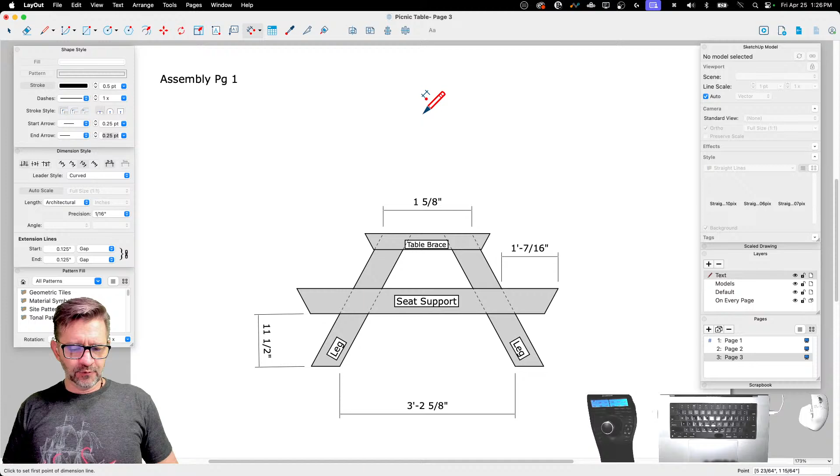The only other thing, and again this comes into foolproof or dang foolproof, is screw callouts. Because what I could do is come in here—I've done this before—I'm gonna draw a little circle. Go back to solid with that, we don't need a dashed circle. That was kind of hypnotizing actually, as I was drawing that circle and it had dashes, because look how it adds dashes and spools through them as it goes.

Oh man, yeah, I'm getting dizzy here. Whoa, all right, don't look at it for too long. Come on, I'm going to make a short of just that, and it'll be on repeat on YouTube, you can just watch that circle go. All right, I'm going to fill that with probably like a red color, something like that, because it'll stick out.

And just call out screws. Oops. I have no idea how many screws actually have to go in here, but I'm going to put 4 right there. And then those 4 I'm going to copy and put them up here.

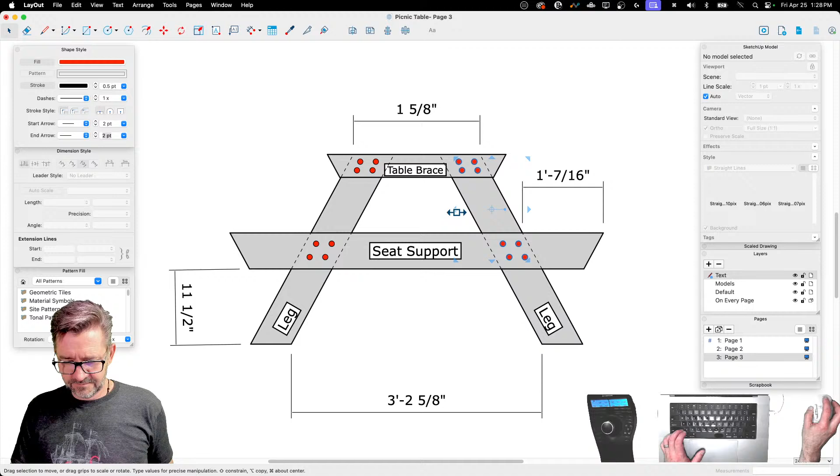Awesome. And then probably what makes the most sense is some kind of a note that—sorry, apparently again I can't draw.

Yeah, I was going to ask if you can flip things over themselves in LayOut, but the reverse scale was a good approach. Yeah, there's probably a different way to do that, but old dog, same tricks, you know.

I'm just gonna put a note down here, something that says use 2 3/4 wood screws. Oh boy, screws.

Actually, here, we'll do this like this. We'll grab one of these red circles. That should be good enough. I like to try to take stuff like this and keep it in groups too, so if I group that, that's just easier for me to figure out where I want to put this.

All right, so there's page 1. Pretty simple, all the pieces are there, simple enough, it goes together. Oh, we do need another note here though, because we do need to say repeat twice—yeah, build twice. Yes, yes.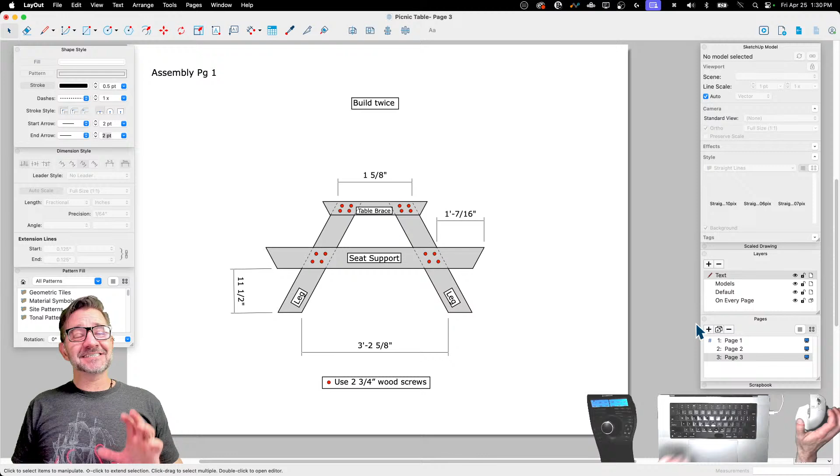This is honestly looking more instructional than IKEA instructions. This is looking good—well, I can use words. That's this set of directions. I apologize for our international viewers, it will not be localized for anything other than English, because this is the only language I speak fluently.

All right, let's keep moving. Let's duplicate this again. So on page 4, we're not going to be building twice. I am going to, again, delete. We'll keep that on there. We'll keep one of these off to the side to use to call out our new pieces. These will all go away.

Actually, a whole bunch of stuff's going to go in. Get rid of all this. Get rid of all this. Not going to have any back edges. I will grab these, and we'll just scoot them over here too. All right, there we go. And I can grab this piece, and we can go to step 2.

At this point, it kind of becomes a situation of rinse and repeat. So we're just going to do that same process through each step, showing what's new on each page. There we go.

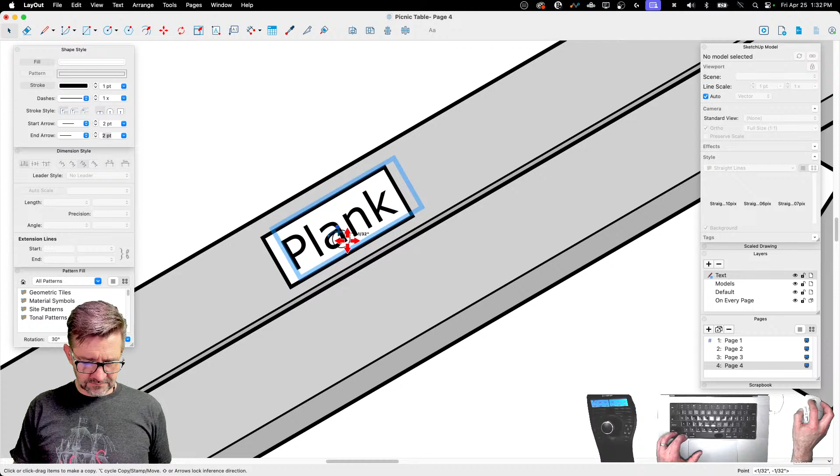So in this case, I just want to put on this piece that this is our plank piece. Just plunk down a couple of planks. These planks were made for sitting. That's almost right. There we go. Plank, plank, plank, plank. Ah!

Yeah, I just don't know. I don't even know—it's the shift key, it's too big. I don't know. Yep. All right.

And then for these, we'll probably do something like this. Option—there we go. Option.

Cool. Don't forget to change the title, page 2. Oh yeah, I would have sent that out. I would have sent that right out the door.

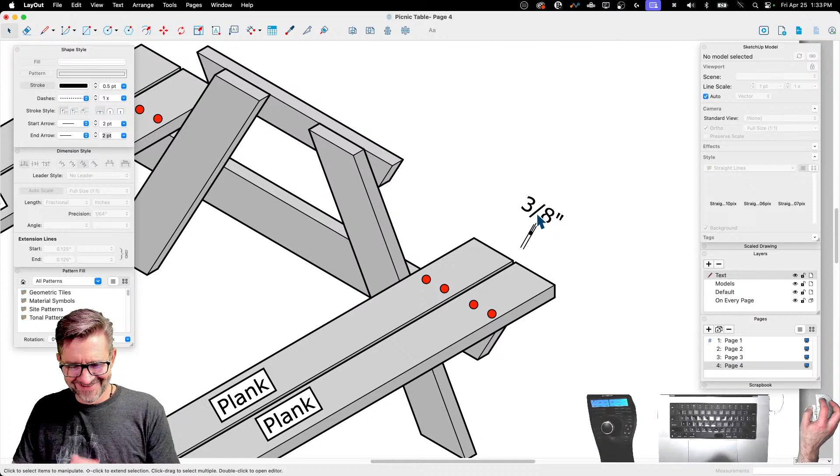I know. One of the other things—there's not a whole lot to dimension here. One thing I may put a dimension on is just this little gap right here. That's ugly, we can clean that up a little bit though. That's ridiculous, that's so small. All right, get rid of that leader line.

You know, with something like this too, I'd probably like maybe like that. I don't know, it's hard to tell what it even is, man. You could draw some dashed lines coming off the actual bench and just draw—that's true—an arrow with a dimension.

Yeah, yeah, you know what, let's just do this, watch this. Let's just—right here, there we go. We'll just say 3/8 inch gap between planks, T-Y-P.

Means typical. All right, there we go. All right, and that's that step. Oh no, it's not, because we will have another dimension—we need to know how far apart to have these two A-frames. So we'll have one more dimension from here to here. That is it.

It's looking good. I guess I could dimension how far they overhang. I'm just trying to think of any other information that might be helpful, so I might be able to see—I don't know if I can actually snap to that point though. I also don't remember what the actual value is that we put in there. I don't want to misinform anybody. All right, looks good. I guess a note that says 'even overhang on both sides,' but we'll just call that good.

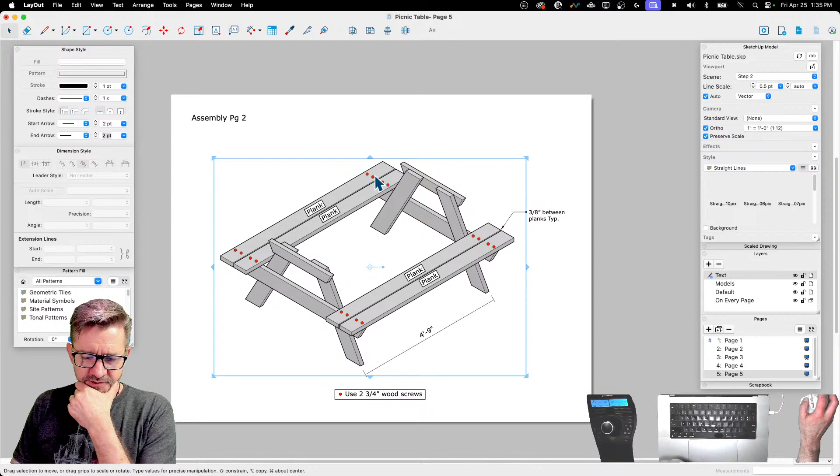All right, I'm going to duplicate that again. This time, before I do anything else, I'm going to jump straight to step 3. Oh, so close, it was so close. Because I'm kind of wondering if I can actually get this to line up with where that other piece was.

Yeah, I do like that your arrows are being displayed. It kind of feels like a Dance Dance Revolution type thing—my feet are moving.

All right, so put that there. All right, we got 5 planks. If these are properly spaced apart enough.

I'm gonna go with a boom on that one. Boom. Boom. And then a little more boom. Get rid of these—not because they're not there, but because they're not in this step.

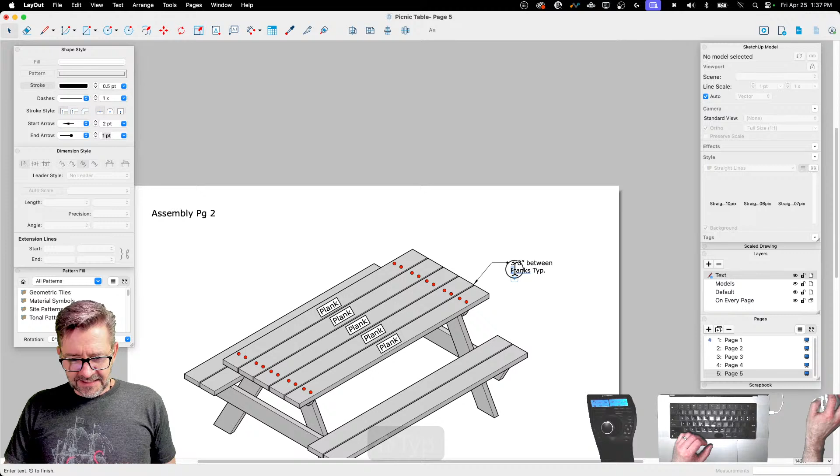It takes a village to raise a plan.

Do we have any good ideas come through for Star Wars Day? Yeah, let me go up in the chat here. It's been a while, actually. One sec, I'll try back in.

All right, I'm gonna duplicate this. We're almost there, we're getting to the bottom of the scenes we have created. Take this one, and this is going to be very different when we jump to 4 because we've got that upside down view. Slide that over, get rid of that, get rid of that. I'll keep one of these and then throw out the rest. I don't remember.

There we go. Get that vertical.

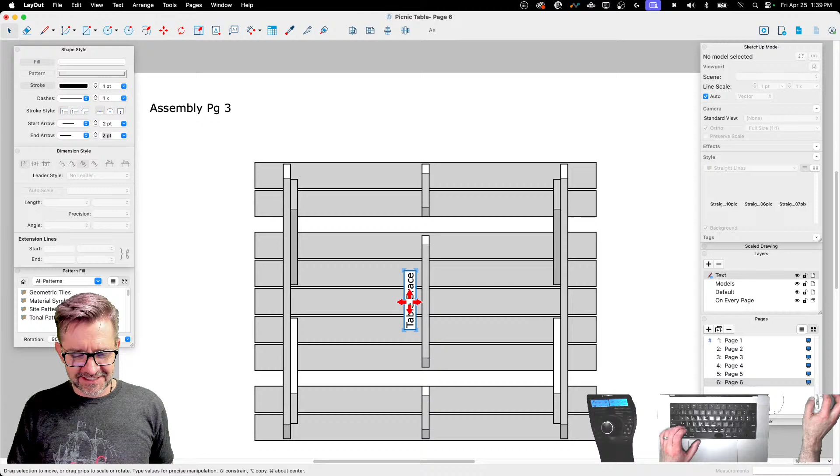All right, yeah, let's see. Not a ton of ideas. Jupe did say, quick one... Death Star. So maybe we can just model the entire Death Star in 2 hours. Sure, that is definitely an idea. I think we've done it on some Ask Me to Model Anything. I believe we did Death Star modeling as a joke, and it went very fast because it's basically a circle with another circle subtracted from it. That's it. Yeah, it's efficient. It's a good design. Millennium Falcon. Yeah, we could do some scale figures for Chewbacca and company. I like it. I like all these ideas so far.

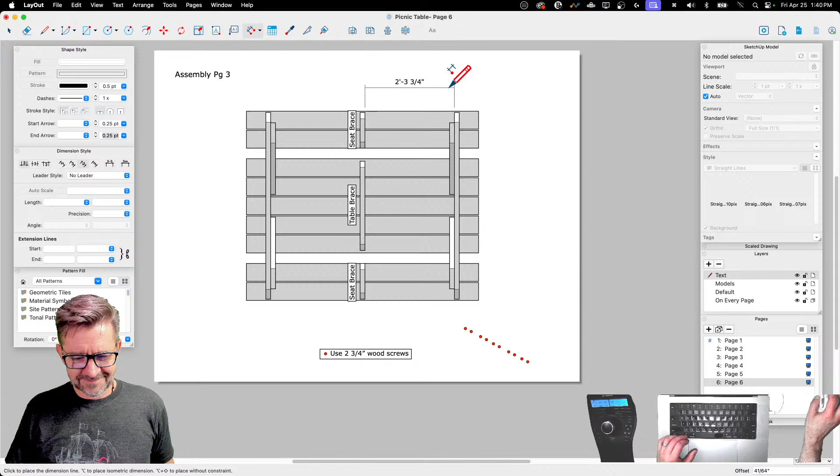I will say, I'm going to throw this out to the chat because I don't know who's been around for the longest, but does anybody remember the very first thing that we modeled in a live stream? It was back on Facebook. That was before we were multi-streaming. We were one platform only, and that was Facebook. But does anybody remember what that first model was? I'm just curious if anybody got that. Yeah, I'll keep you posted. How long ago was that now? Matt might have to double check me, but I think that was like 6 years ago. Wow. Oof, yeah, it was a while ago.

I just wonder if anybody here has been around that long. If you haven't, don't worry, you weren't missing much. That was old school. Yeah, you have a green screen now. That's right. We're a big deal now. Because that's what separates the amateurs from the pros, spending $100 on Amazon. True, yeah, totally. I don't have a green screen. That's why I'm not on camera. Hey. CJ Ryan says, sure, the Falcon. That's right. That was it. Nice. Gold star to CJ. Were you there, CJ, or did you go back and look at some point?

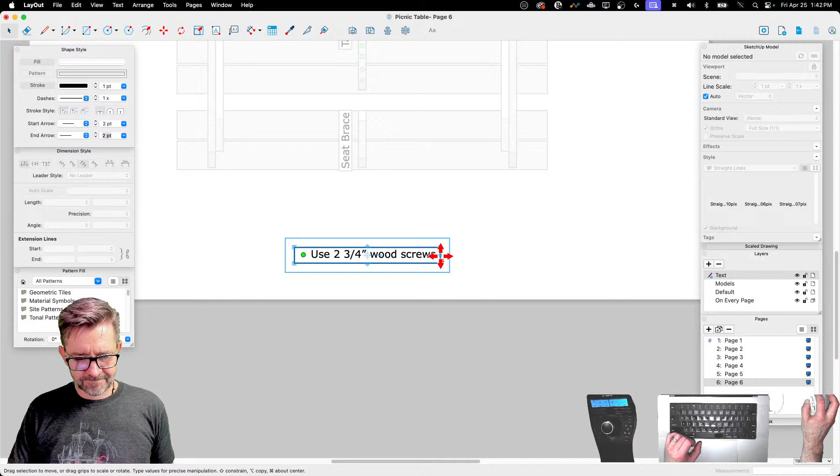So I'm going to do this for these bottom ones. I'm going to actually change the color on them to green and change the note to note that these are to be filled or put in from above. Cool. Oops, my dot. Yeah, different color should be enough. All right. I could probably call out that it's centered, but a dimension doesn't hurt.

Oh, and without Justin telling me, quick. 4. Oh, man, you got me. You're still a valuable member of this team, Justin. Appreciate that.

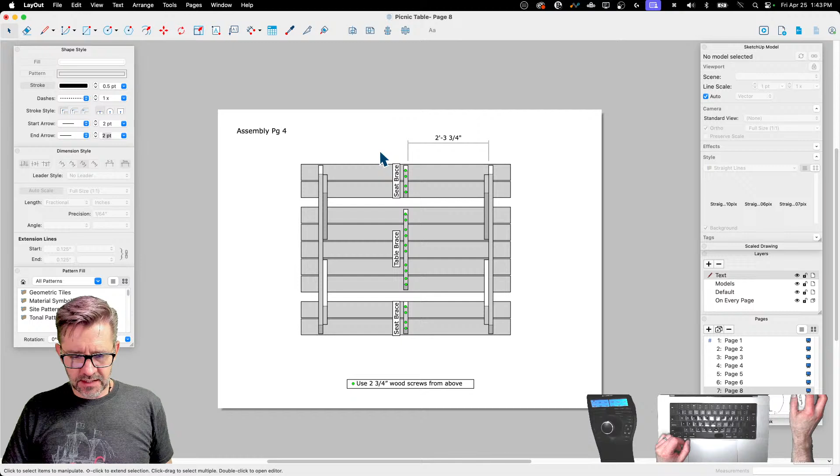All right. Oh, we need to put a couple more screw call outs. I'm so programmed. I do stuff because my brain tells me to and it's not always the right thing to do. All right. Oh yeah, we do have a reminder in the chat here to save the file. Done. Did it. Nice. I'm going to duplicate that one last time. Oh, I hit new. I did not mean to do that. I meant to select this and hit duplicate. And on this last page, hold on to one of these. Get rid of all this. Grab this. I'll just do it first so I don't forget. I'm on a streak now, 2 pages in a row. Jump to step 5.

Yeah, Earl says those screws need to be spec'd so they don't poke through the top, which is true. That would be a bummer if your picnic lunch got stuck on the table. Yes, that's why I specifically said use 2 3/4 because those should not stick through 3 inches of material. If you push hard enough, you can get it to come through, but shouldn't. Just keep drawing. Lean into it. You can do it. All right, there we go.

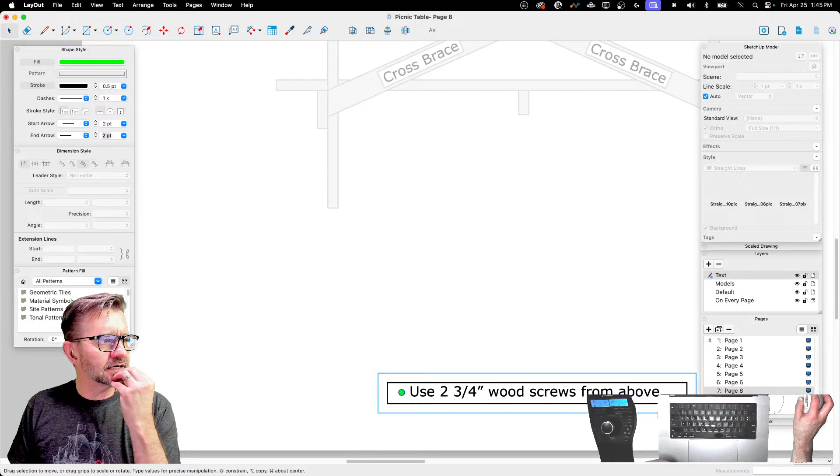And one last circle here. We're going to change color again. We're going to put this to be a blue circle. And blue is toenailed. So shoot these in from an angle. I guess these ones could come in from the end. I guess I don't have to get too specific here. But yeah, so I'm gonna grab. Oh, oh, oh. Put those up there.

I think what I'm learning is you grab something, you hold down the Option key, and then when you go to grab the next one, you have to release and push the Option key down again to make a second copy. I'm just holding it down, and it's only working for the one. All right, that's the final page. Nice.

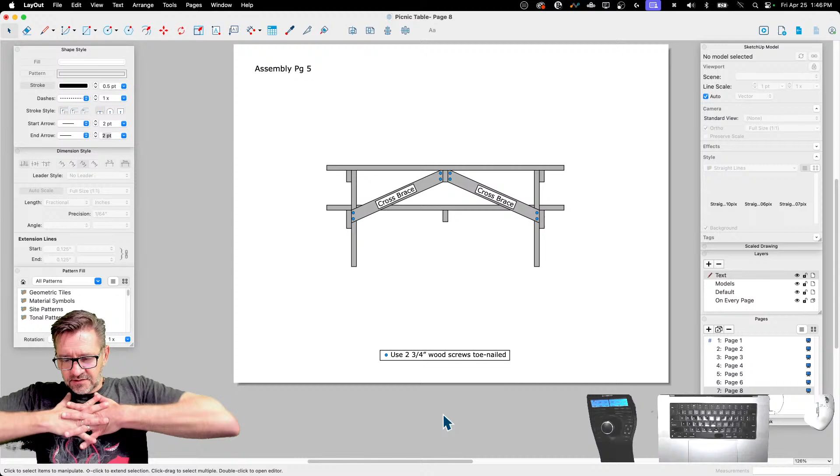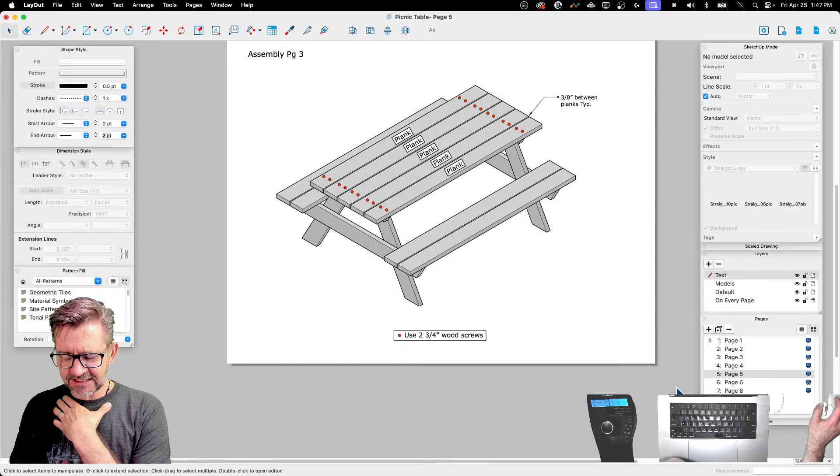Next page: layout flat, leg, support, screw, build 2 of them. Go to the next one. We throw some planks on, 3/8" apart. Throw more planks on top, maintaining a consistent space between planks. We flip it over, we throw a couple of braces on here and screw them together from the top. Throw our cross braces in. We got a table. Nice.

I feel pretty good about that. I think that turned out kind of cool. All we're missing is a final page with some instructions for how to make a really good pasta salad or something. The bonus. Yeah, and then one sheet on the back, which is some food options. Yeah, a sign-up sheet really for the things you're going to bring to the picnic. I like it a lot.

Cool. What do you guys think? How's that? Are we still talking Star Wars? Should I just not interrupt that? Some people are talking Star Wars. Earl says, "Well done, Aaron." So, hey, thanks, Earl. Starting to get some love in the chat here. Should probably save that again. With 12 minutes to spare. I like it.

Yes, we can all fit around it as long as there's only me and then 3 or 4 other people on the chat. Well, there's 63 people chiming in right now, so it's going to be a little bit of a squeeze. We're not going to be able to build this to scale. We're going to build it a little larger. Yeah, we're really going to need to add some additional screws in there for stability. Yeah, that's going to be something.